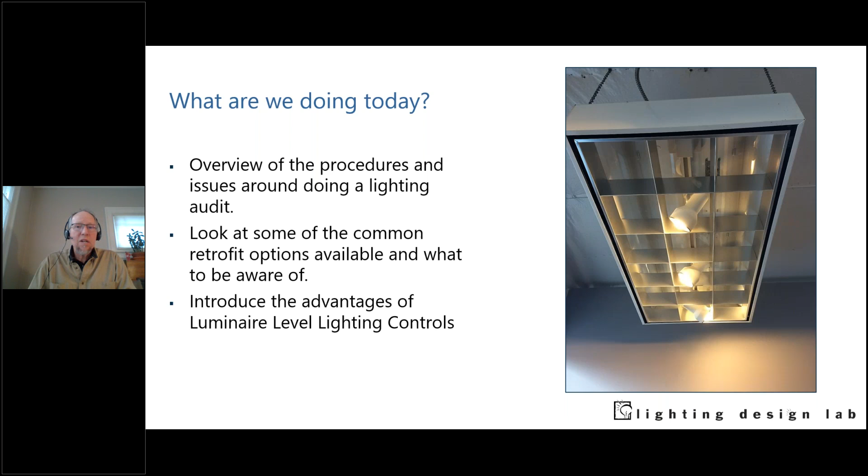So what we're going to do today is just talk about a little overview of the procedures and issues around doing a lighting audit, look at some common retrofit applications, and then we're going to talk a little bit about Luminaire Level Lighting Controls. I know you're all excited for that.

And we're going to try one of our little Slidos here. Let's see how that goes. I think Katie's going to run the helm on that one. You're not logged into it. Oh, so yeah, I logged in unfortunately. Well, the login in PowerPoint isn't logged in, I think. So we might—do you want to skip it? We can skip it. Mostly I was just trying to get a sense of the audience today. But I think what we'll do is just assume, just type in the chat. Yeah, if you've got questions, we're more than happy to try and address those for you. And I can't really, I know I can sort of see the chat. Yeah, sorry about that. Let's just power through this then. We'll go to the next slide.

All right, so when you're starting a project, meeting with the various players, it's always good to not really make assumptions about what you think the goals and motivations are for this project or for your client.

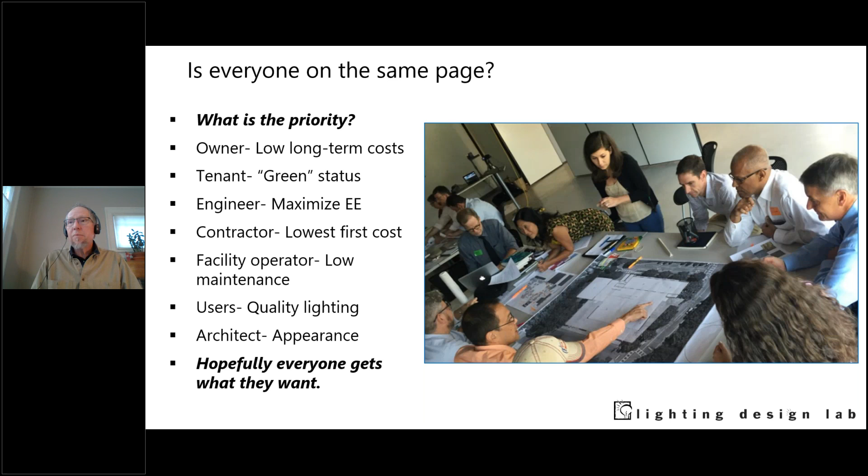So typically when we get called in on a project, it's because there's problems. There's lots of easy projects out there, but there's also difficult areas. You don't want to get bogged down right off the bat on the hardest part of the project. Take the big view, look at the overall project, find out if there's lots of easy energy savings, and then once you've got all those things lined up, spend some time on those difficult areas.

Another thing you might do is press a little bit if their goal is to retrofit all the lighting. We hear this a lot, that they want to go all LED, light emitting diodes. That's the new light source, and there's a lot of good reasons to do that. But some fixtures are going to be very difficult, if not impossible, to really retrofit with LEDs.

You're looking at probable replacement of those fixtures, and you just want to find out if that's really within the scope of what they're willing to do. We've seen a project where everything was pretty much easy, except they had some bollards out front in their parking area. Those were just going to be impossible to retrofit, and they were relatively new fixtures, so replacing them wasn't really a great idea.

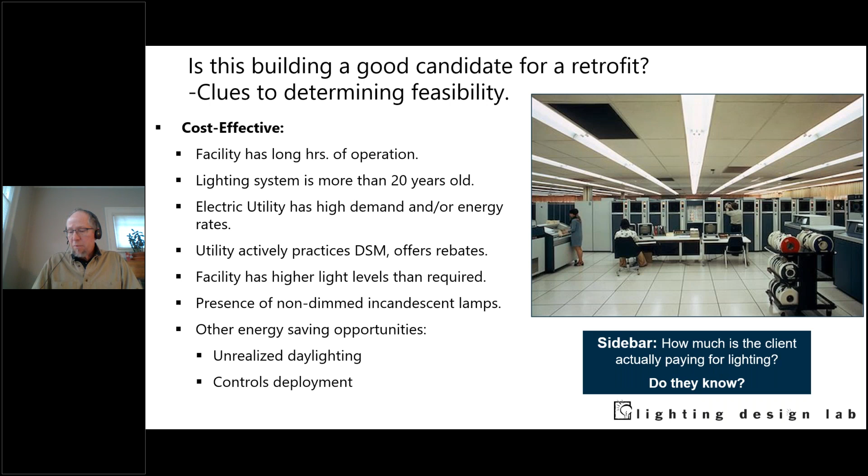Another thing that doesn't hurt is to see if you can find out how much the client is actually paying for the lighting. A lot of times they don't know - they just see a big electrical bill and assume it has to do with all of these things. But if you can parse out what the lighting component is, that may open their eyes and get them to do something.

Projects that are not particularly cost effective would be ones that have fairly short hours of operation - maybe it's just a 9 to 5 operation, 5 days a week, so they're not really using a lot of energy. Or the facility exceeds the existing efficiency requirements - maybe it's already a fairly new building, and it's got relatively stringent energy code thresholds that it's already met.

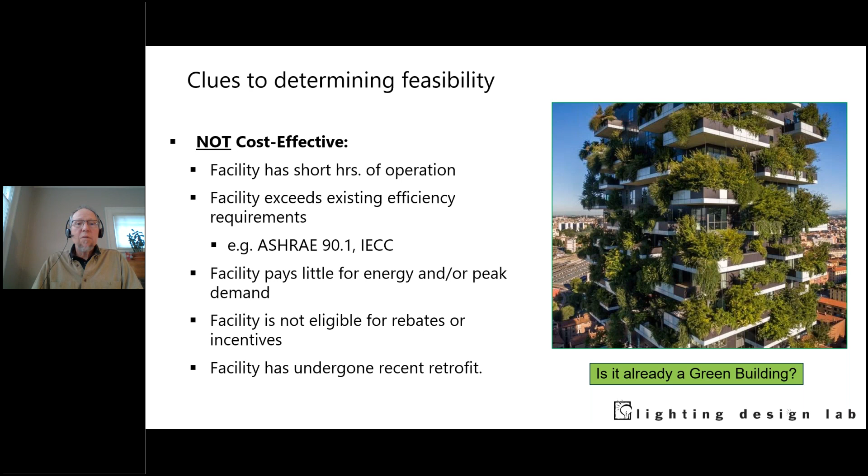It may already be a green building, as they say. Maybe the facility's undergone a recent retrofit, so the building's old, but you can look at the lighting and say, well, this was retrofitted 15 years ago, so it's still fairly modern lighting. All those things are going to be important to know going in, so you can set your client's expectations.

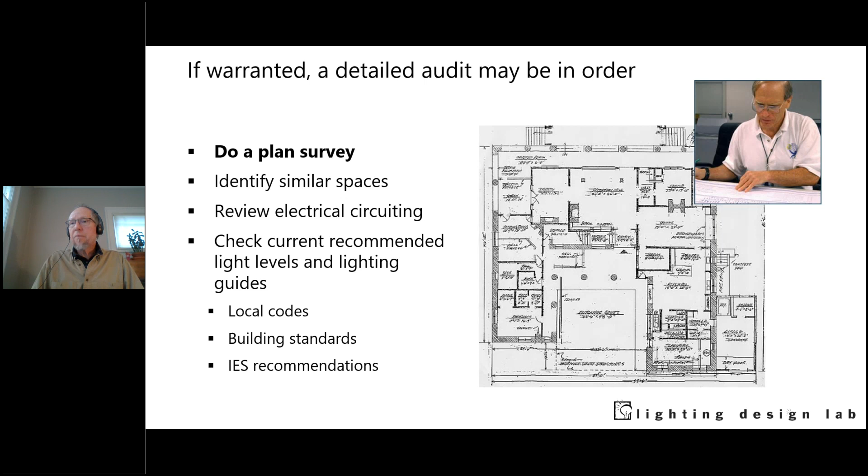You might have a fairly large facility like a school where there's lots of different rooms, but guess what, a lot of the rooms might be very similar. So once you've figured out what they have for their classroom, you're just replicating that over and over. You can look at what the local codes and standards are and see what the recommended light levels are based on, maybe they've got a campus-wide standard that they use, or there could be recommendations from a governing authority like the Illuminating Engineering Society, the IES recommendations. They maybe say, well, we just follow that. And that'll just give you a sense of where they're coming from. We'll talk about that a little bit more as we go.

So as you go out to even do a basic walkthrough, some things that you might want to have with you would be a light meter. For me, I don't put a lot of stock on measured foot candles, but it does provide a reference for what's there, and it can give you at least something that you can come back to, and we'll talk about that a little bit more.

You want to be able to measure things. One thing I can do in certain kinds of spaces is count ceiling tiles, and if the ceiling is 2x2 ceiling tiles, or maybe 2x4 ceiling tiles, you can just count them, and that's a way to get a rough measurement of the general size of the space.

Laser pointers are good, or rather laser measures, but just be aware that those don't always work outside during the day. There's too much light to really see them. So be aware that if you're doing that, you may want to bring a 100-foot tape or something like that if you're doing exterior light audits, so you can figure out how far the poles are apart, or something along those lines.

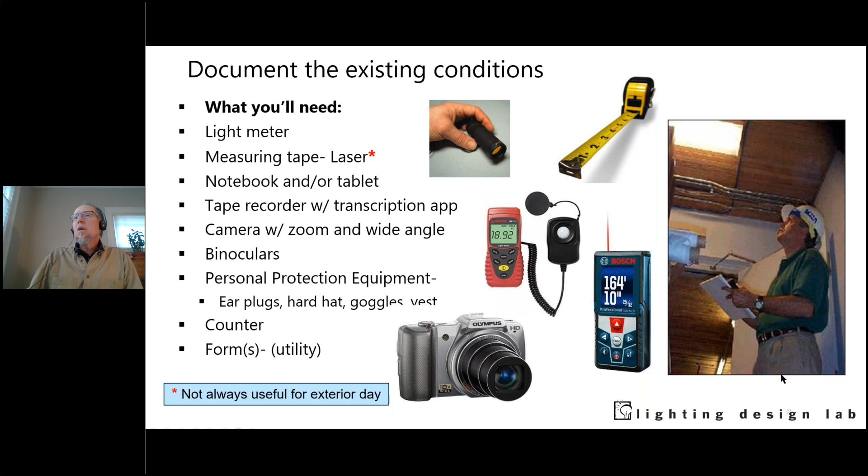So when you are looking at the lighting systems, you're going to want to look at the existing light levels, especially if the client says something like, oh, it's not bright enough, or it's too bright. That can give you a reference point.

You want to look at the types of luminaires or light fixtures that they have in place, and look at the mounting, how they're mounted. Sometimes a facility can have the same or similar fixtures mounted in different ways. A lot of times, particularly in industrial or commercial and some utility applications, you'll see a wraparound type fixture hanging from a chain, mounted to the wall, and the same fixture stuck to the ceiling. So that can be an easy way to know that even though there's lots of fixtures, they're all pretty much the same, if not identical.

You want to look at what lamp types are in the fixtures, and look at the color, to at least take note of the color of the light. If the color is consistent, and if you can find out the wattage, that's always helpful. You'll definitely need to know that at some point. Also the ballast type that they have, particularly for fluorescent systems, and what kind of daylighting conditions they have, and is there an opportunity to improve that?

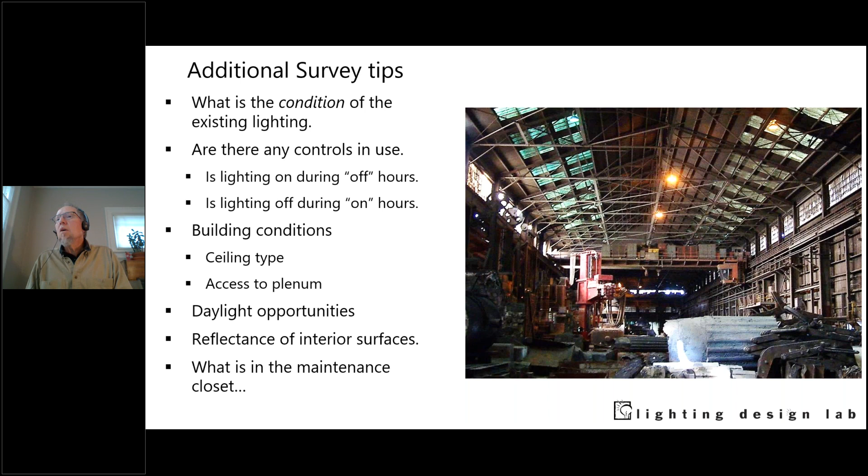So we have a little quiz. Katie, I don't know. I think what I'm going to do is just talk through these as we go. What do you think? Yeah, because I think our Slido isn't working. And so here, this would be a little review, we'll call it.

Which of the following suggests that a retrofit is likely to be cost effective? As we talked about, the facility has long hours of operation, so check. Measured light levels are higher than recommended practice, so yeah, that's another positive. So here we've got a community theater that has 50 stage lights that are 500 watts apiece. And so here's a case where we've got high wattage lights, but they get very little use. Maybe they do 4 productions a year for 2 weeks each. So otherwise they're off. So not probably a lot of return on an annual basis there.

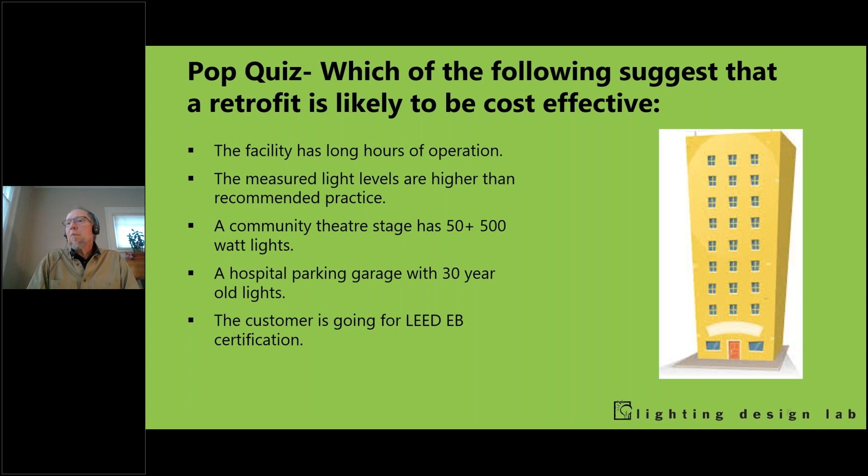Hospital parking garage with 30-year-old lights. So, again, a parking garage is going to get lots of use, particularly at a hospital. It's 24/7, and the lights are old. And then the customer is going for LEED existing building certification. So all of these really, except that middle one, would be good opportunities.

All right. So documenting existing light levels. So we'll probe on this a little bit more. So what is being proposed? A lot of times they'll say, oh, well, we need 100-foot candles, and I've seen retailers say that. That's just what we need. And it's a nice high round number, but what's it based on? You can find out, you can ask them about that, and we'll touch on that in a second.

What is recommended, and then what is that based on? They might say, oh, well, we've heard we need 70-foot candles. It's like, okay, who told you that?

Are the light levels consistent throughout the space? Sometimes they'll say, oh, we just need more light in this warehouse, and it turns out there are a couple of aisles that are dark because maybe some fixtures aren't burning. But for the most part, if everything was lamped up properly, the light levels might be pretty good. And then, are the users happy with the light levels?

They might say they don't like it, but again, you're thinking, well, it's not that bad. So then you have to find out what is it about it that they're not liking. It doesn't hurt to have some of those conversations.

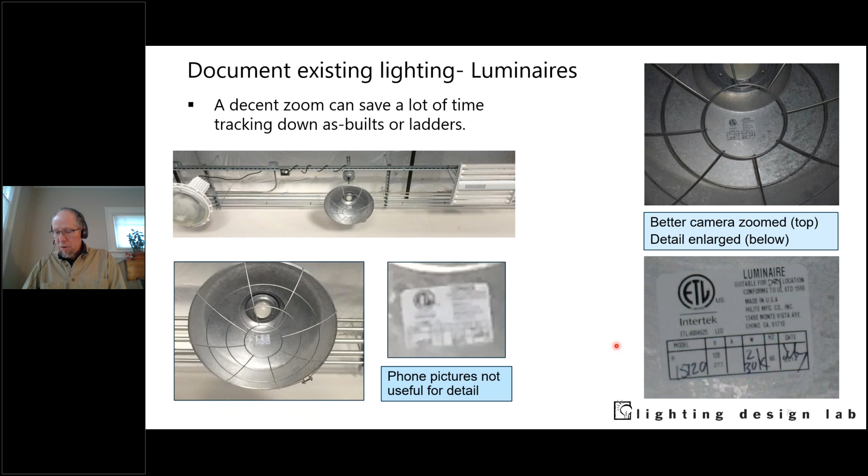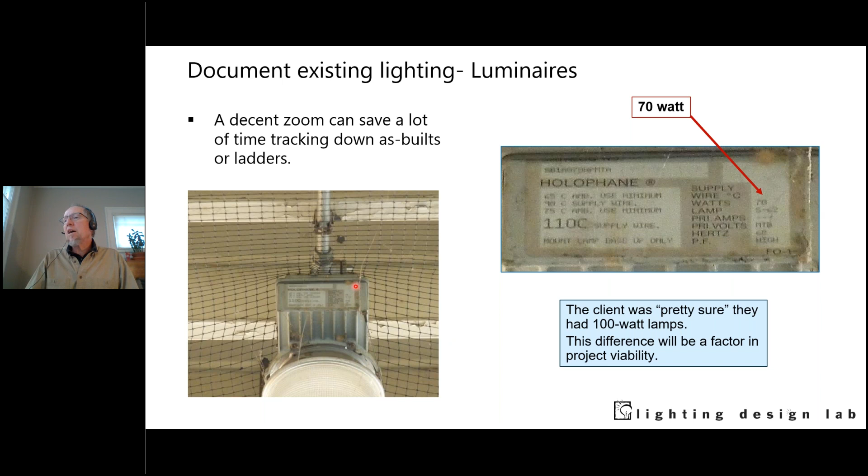Getting a ladder or a lift out to read that on site just would not have been practical. So it's good to have that equipment.

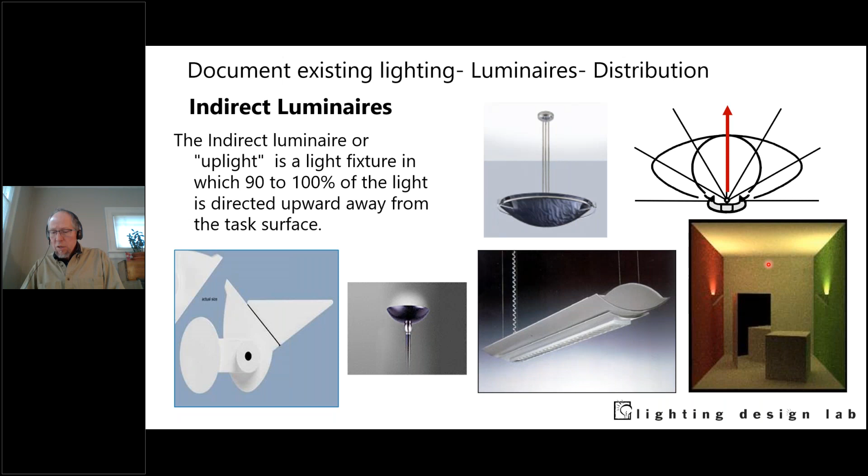And then a lot of fixtures are going to be some combination thereof — some light goes up, some light comes down. There's a wall-mounted fixture with a dish; maybe this one's a better performer, sending maybe 30% of the light out. We're still getting an indirect and a direct component with this linear product — a good amount is out the bottom.

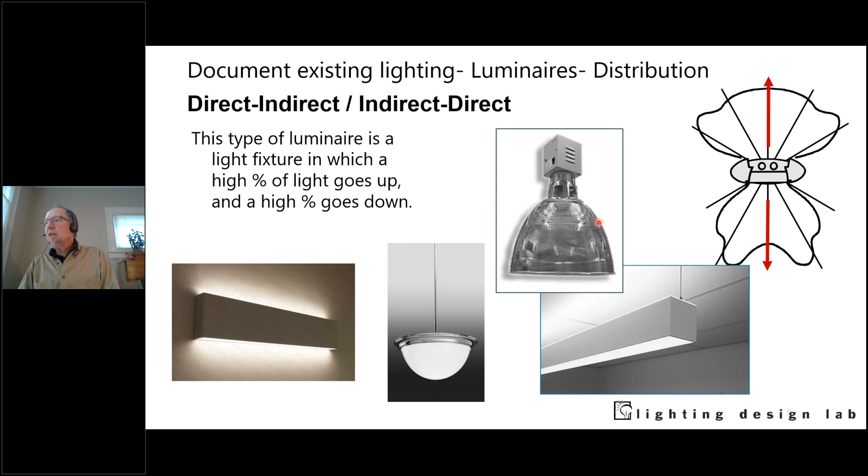Even some of these prism type fixtures, depending on how well designed they are, if it's an actual glass prism, most of that light will be coming out the bottom, even though it'll glow a little bit at the top, and that's by design. Whereas others, maybe it's molded plastic, it's sending light out the sides and out the bottom. So you kind of need to know a little bit of that information.

But it might be a big surprise once you get everything all retrofitted and it turns out the ceiling's dark, the walls are mostly dark, just because they didn't really understand what was happening.

So then, as far as auditing, looking at the overall condition of the components, you've had a chance to look at the general outside of the fixture, and maybe you can tell a lot just from that, but sometimes you can't. So you want to open up a few that you think are representative.

Are the sockets all worn? Do we have stuff dripping? Is that water intrusion? Is it some sort of fluid coming out of some of the components? What's the deal? Is the wiring all haywire? Has it been retrofitted? That kind of thing. A little superficial dust isn't what you're after, but it's a basic breakdown of the components.

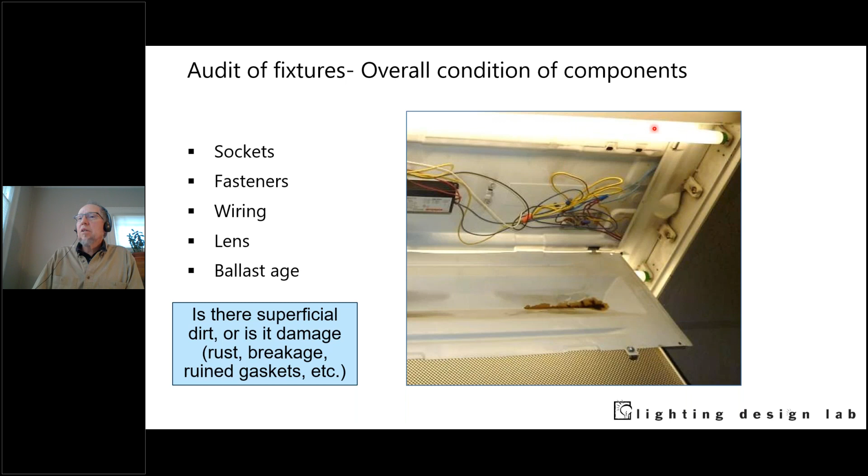So if you are replacing fluorescent lighting with LEDs, and we'll talk about that at some length later on, you're going to need to look at the ballast, and that'll tell you a couple of things. One thing, it'll tell you the voltage, like do you have 277 volts or do you have 120 volts. How old is it?

A lot of times the utility, especially if you're wanting a rebate, they'll want to see the ballasts. So you don't want to just throw them all in the dumpster before you've had a chance for an inspection.

Another reason you want to look inside is twofold. One is to see if they're consistent, right? So this is in one room in one building, and we found a 2-lamp normal ballast factor, a 2-lamp low ballast factor, a 3-lamp normal ballast factor, and a 2-lamp fixture. We found some battery backups. We found some 277 volt product.

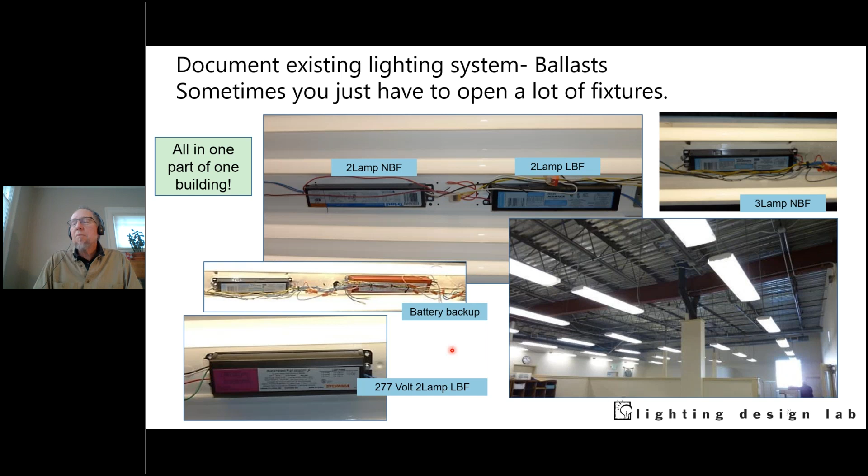So some retrofits you do, the idea is that you're going to use the existing ballasts, and we'll talk about that later. But they have to be consistent, they have to be adaptable. And if they're not, you're going to run into problems. Here we have a whole hodgepodge of things, so you have to check that going in. It's pretty rare that you're going to find all the ballasts the same, so just keep that in mind.

Then you want to look at the existing controls. Especially sometimes you're in a situation where certain controls are not allowed. For instance, an older way that we would see industrial applications, or sometimes even in a school gymnasium, they just have breakers that control the lighting. So someone would come in at 6 in the morning and flip all the breakers and all the lights come on, and that's how they would do it. And that's not allowed anymore.

But they may have old mechanical time clocks — those aren't allowed. It may be sensors, particularly exterior photo sensors; they really take a beating, so you want to be prepared to replace all of those on any kind of retrofit. Or they may have old style dimmers that won't be consistent or compatible with the new lighting.

I also want to look for a chance for some easy wins. Here's a case where we have a canopy with lights that are on all day. These could just be on a timer. You could say, at 9 o'clock in the morning we're going to turn these off every day, and they won't come back on until 5 or 6 at night. That would be so simple. If you could put sensors in there to tell you when it's not daylight, that would be another easy way to do it.

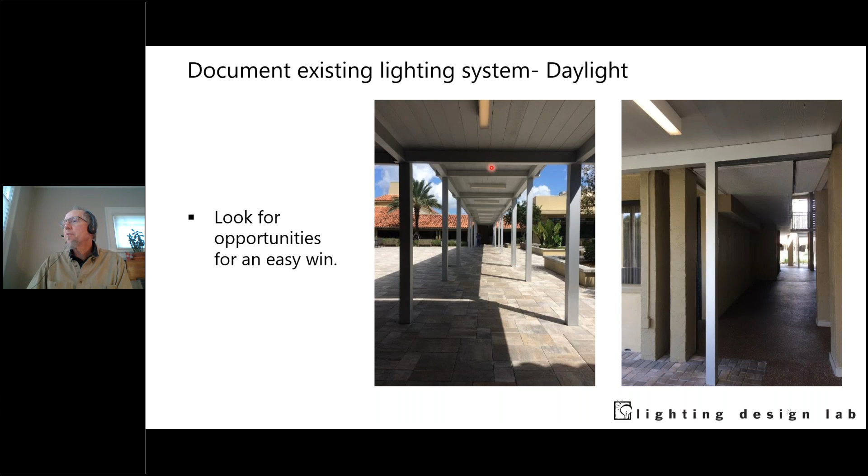So while you're out there, you want to look at the room surfaces. What you're trying to do with a lighting retrofit is improve vision — help the lighting help people see. And part of that system is the room surfaces. They can mitigate brightness ratios, which is controlling contrast of tasks and backgrounds, and they can also help you get more light.

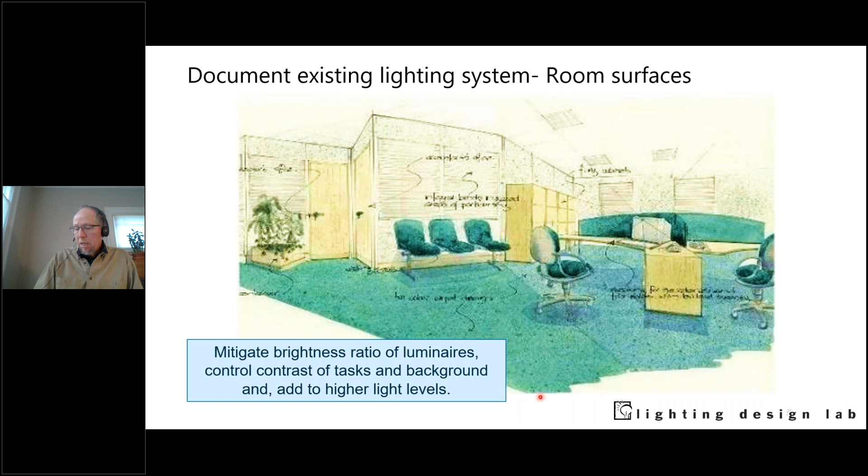Here's a case where I did a little model of a simple two-story office building. We've got some windows, but let's say it's nighttime or early morning. We've got a first floor and a second floor, and the second floor looks brighter. There's a reason it looks brighter — that's because it actually is brighter. And we can prove that.

So we took light level readings, or at least modeled the different light levels. Depending on your skill level or the team you're working with, you may run a model on some of these spaces, particularly warehouses or simple big box type spaces. Even parking lots are fairly easy to model. That's just a way to double check.

With some simple modeling platforms, all you do is put in the number of lights you're planning to use, the geometry of the space, and the layout of the lights, then hit the big go button and you'll get a number. It's like, wow, 35 foot candles, let's say — so here's our average foot candles, we get 35. We'll use that as our baseline.

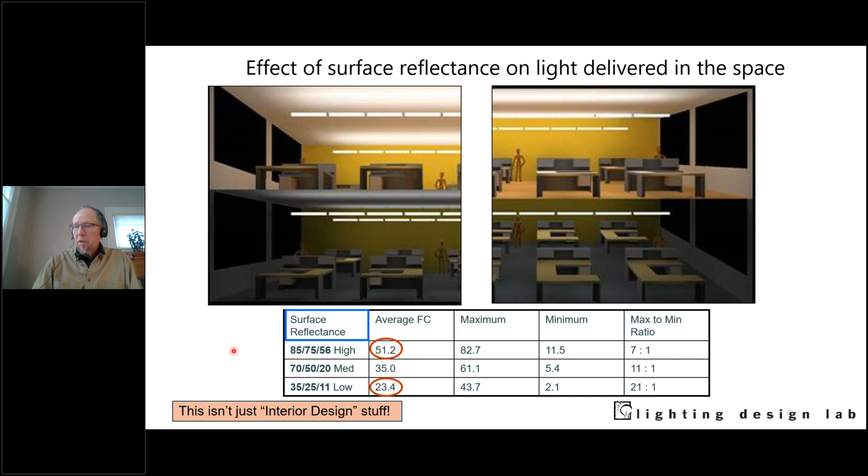And you're thinking, well, who's doing these dark surfaces? But this is pretty typical: saturated wall colors, dark floors, concrete, not uncommon to see. Here's an industrial application, and they just went and sprayed everything bright white. It's much safer, good visual acuity. Same thing here. But it can be even in humble areas. It's just a way to save energy and make it a safer environment.

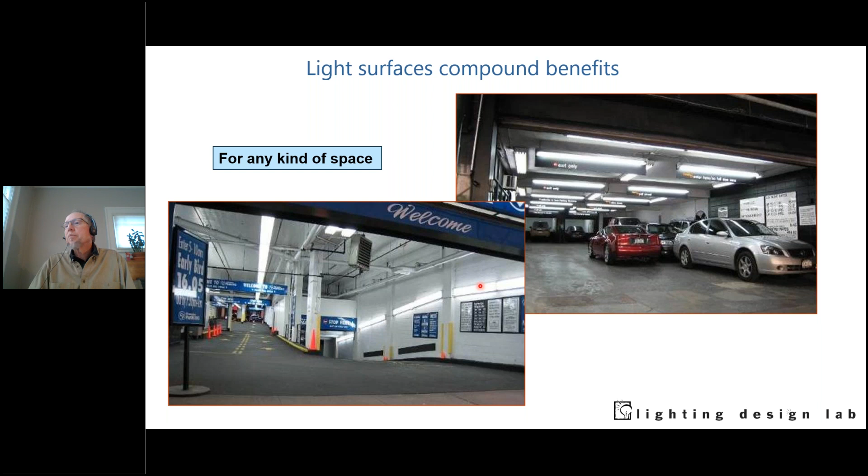So how do you know the room reflectances? Well, one way you can do it is you take your trusty light meter. See if I can do this here. And you take your light level on the wall, take a reading, and write it down. And then you hold the meter out about 12 inches from the wall.

Now, you probably don't want to do it near a window. So you want to find a space that has sort of typical lighting. And you take your light level reading there. So now you've got two light level readings, and you just run a simple calculation with the light that's incident on the wall and the light that's reflected off the wall. And that gives you your percentage of absorption. So you can use that number.

And sometimes you'll see color. Another way to do it, though, as I mentioned, is going into the maintenance closet, you might find the paint that they're typically using. Maybe they're not planning to repaint as part of this lighting project, although I always bring that up with them, especially if I see dark surfaces.

Anyway, so you can see what color paint they're using. As a case here, we've got this cream colored paint, and I look at it and it's 63% reflective, which is pretty good, but it could be better. Here's one that's similar, still very much an off-white, 74% reflective. Down here, this little accent tan - again, this could be the color they're planning to use - that's 50% reflective. So we see a real range here of reflectance.

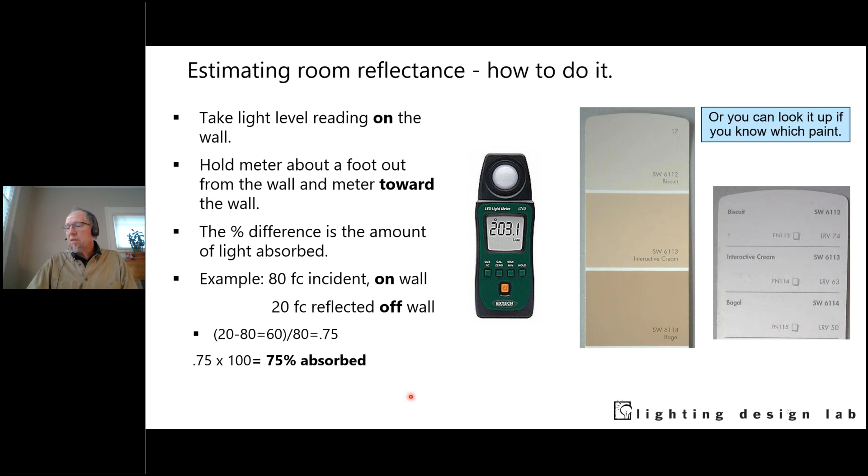Exterior audits. What's the best time to look at exterior lighting? This is kind of a trick question. Would it be during the night or during the day? Obviously it would probably be a little of both, because during the night you can see what the light's doing in those spaces. But during the day you can find out all kinds of other things, like, hey, wow, these fixtures are on, this one's off. What does that mean? They've got problems with their controls, but maybe this one's also burned out.

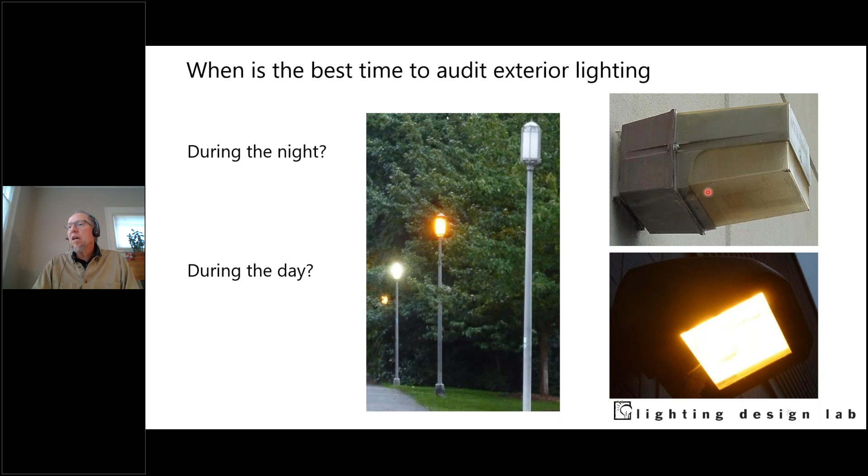Another thing you can see during the day: at night you look at this fixture and all you see is just this bright thing. You can tell it's working, but you can't tell much else about it. During the day you can say, oh my gosh, this lens is very discolored, very worn out. We need to replace the whole fixture, or at least the lens, to get better light levels. But you wouldn't be able to see that at night.

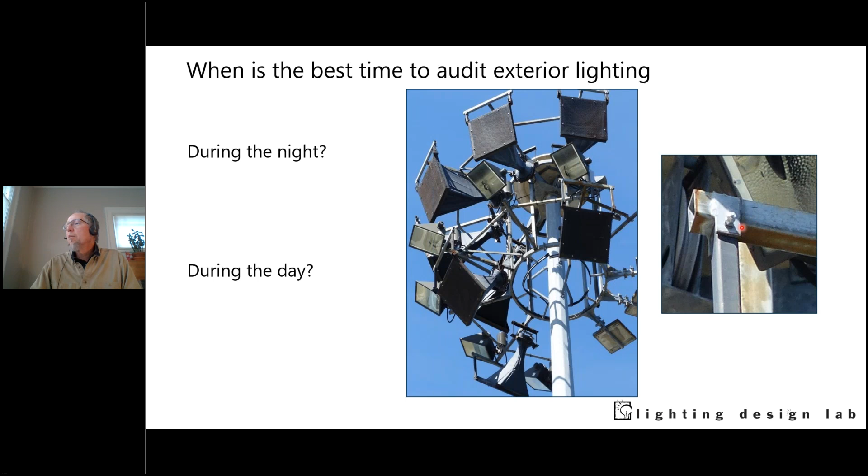Again, your trusty camera with the zoom lens - you can get up and see parts of the components, so you could tell the client, yeah, I know you want to replace all these lights, but you really ought to think about upgrading the structure because I see rust. In this case it doesn't look structural, but you might see some structural issues that you could draw to your client's attention.

Some more advanced analysis tools you might want to use include a luminance meter. A typical light meter tells you how much light is striking a surface - I put it up here and I can tell how much light is hitting that wall. But if I want to know accurately how much light is coming off of a surface, or off a light fixture, I need something different. With a regular meter we get foot candles, and with the luminance meter we get candelas per meter squared. You probably won't be using this a lot, frankly, and these meters tend to be very pricey, but it might be something you'll want to think about.

Data loggers - maybe you've got a warehouse application and the client says, oh, we're going to save a ton of energy because we're just not in these aisles very much. You put a data logger in there and find out, well, you're actually in there 8 times a day in this aisle, 16 times a day in that aisle, and 2 times a day in this other aisle. So you could do some consolidation and maybe get things a little more efficient, or at least calibrate your client's expectations.

Spectrometer - we're seeing more interest in that with LED lights. People are curious about how much blue light they're putting out or how much red light. A flicker checker - we're seeing that again with LEDs, especially the cheaper ones, which tend to maybe have some flicker.

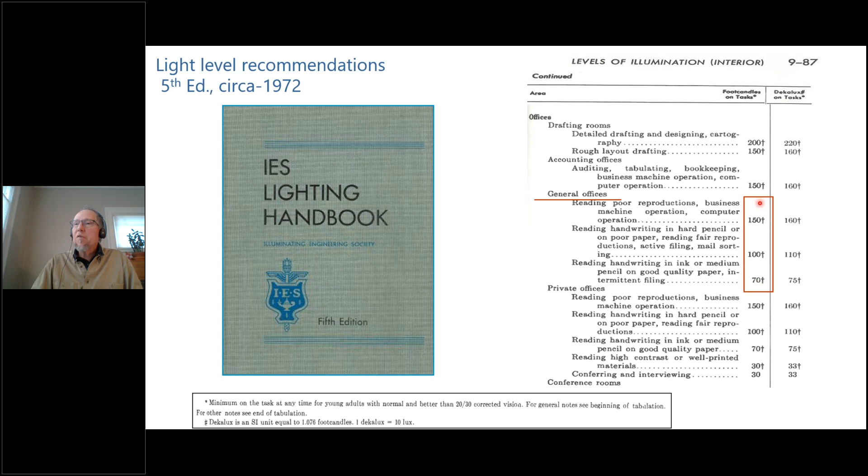So we look at how much light is recommended. Here's the IES handbook from 1972, the 5th edition. Back then, the recommended light levels for, say, a general office application - reading poor types of computer printouts or things that were hard to see - you needed 150 foot candles. If it was a better reading surface, maybe only 70 foot candles. But this was the range they would have for an office application back in 1972.

Now let's go to a more current one - this is the 10th edition from 2012. This is the most current, but it explains the trend here. So now we have offices from the IES handbook - offices, reading and writing. We go to high contrast of a black ballpoint pen, and we get a number here: 300. Wow, wait, 300, that seems like a big number.

Well, if we look here, these are foot candles, but what we currently use now is lux. So you're thinking, oh wait, foot candles, lux, that's going to be really hard to keep track of. The good news is 300 lux is about 30 foot candles - so it's about a 10 to 1 ratio.

Here we have for blue ink or lower contrast, 40 foot candles or 400 lux. So we went from 150, or maybe even as low as 70 foot candles, down to 30 foot candles, which is what's currently recommended for these office applications. So when they say this is based on IES recommendations, ask what year that's from. It might be from the 70s. Time to modernize.

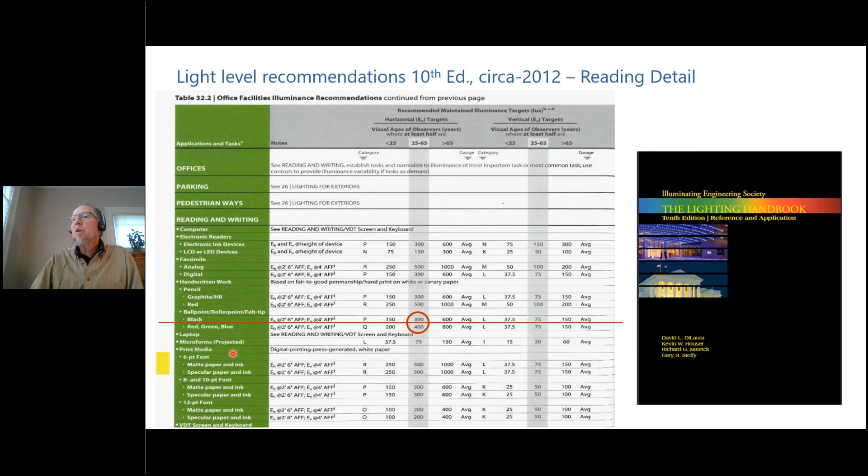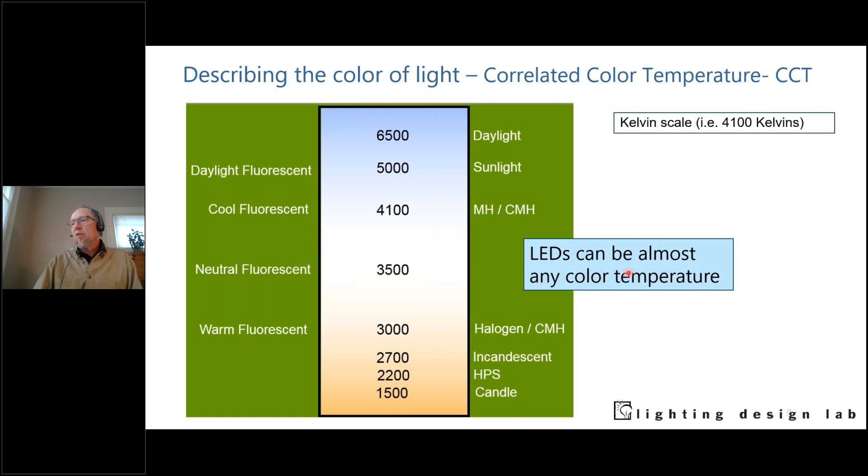Every light source has a number—candlelight would be around 1500 Kelvins, incandescent light around 2700 to 3000. Daylight actually has a number too, although it changes. Sunlight, same thing. Fluorescent lights have a whole range of possible colors. The good news is LEDs can be almost any color temperature—you just have to pick one.

Plus, if you're involved in retail or any kind of hospitality, colors look flat—it's just not good. The good news is almost all LEDs come in good to excellent range, so it's just a case of picking which one you want. Usually the higher the better when it comes to color rendering.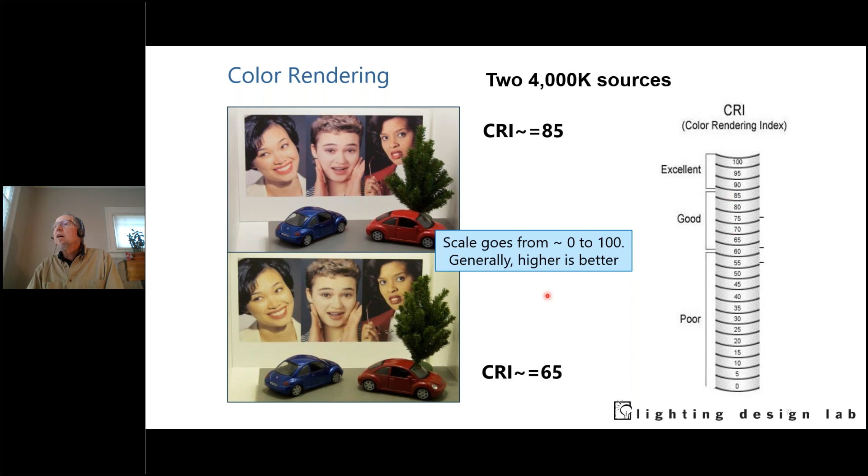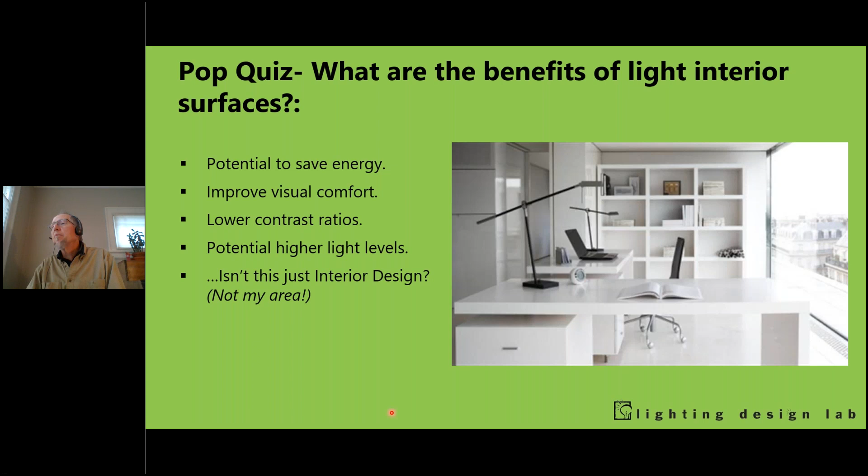Okay, we're just going to blast through these retrofit applications. Common retrofit applications are fluorescent troffers, or maybe I should say anything that uses linear fluorescent lamps. Recessed fixtures are getting retrofitted a lot. Exterior fixtures getting replaced or retrofitted, high bay industrial, and even interior surface mounted decorative fixtures.

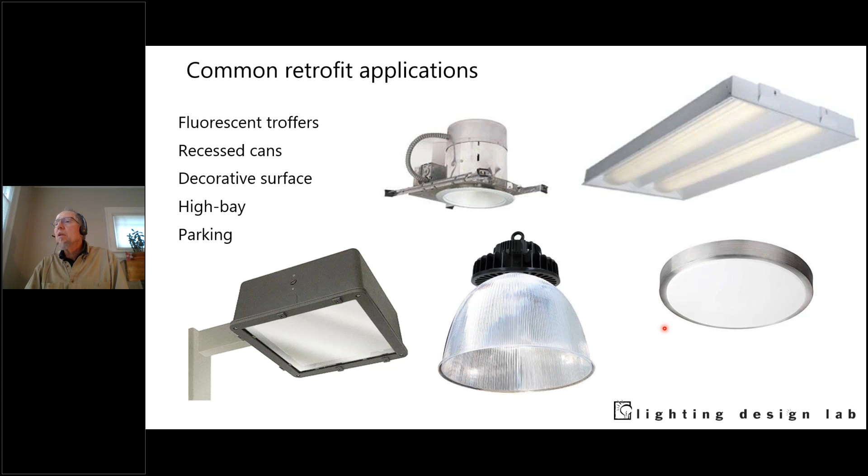So there's a lot of product out there that looks like a fluorescent tube but uses LEDs. We in the industry call them TLEDs - you might see that in some literature. There are all different kinds out there. Some have no lens, or a clear lens, so you get lots of sparkle, which may or may not be what you're interested in, or you might get patterning that's different than with fluorescent. The thing to keep in mind: when these are working perfectly, they look just like the fluorescent tubes you took out, except they ideally use less energy and maybe give you better longevity.

Sometimes they have wide end caps. Sometimes they have metal on them, although we're seeing less of that now. Sometimes they're just made of glass - they're not all plastic. Plastic has its advantages, but plastic's more expensive. There's a whole industry out there set up to make 4-foot glass tubes, and they're trying to get some more use out of that equipment before everything just goes LED.

One of the things about a fluorescent tube is, if here's a cross section of our tube, we get uniform light pretty much out around that entire thing - it's an omnidirectional light source. Whereas these TLEDs generally only have half of them radiant or translucent, and usually it doesn't come out fully - here we've got one that was measured at a 105 degree beam, which we'll see is maybe okay, and it's a 180-degree aperture. Sometimes the promotional material for these will say 240-degree aperture - well, that's great, but I still only get 105 degrees of light, not even 180 of usable light. So you want to be aware of that.

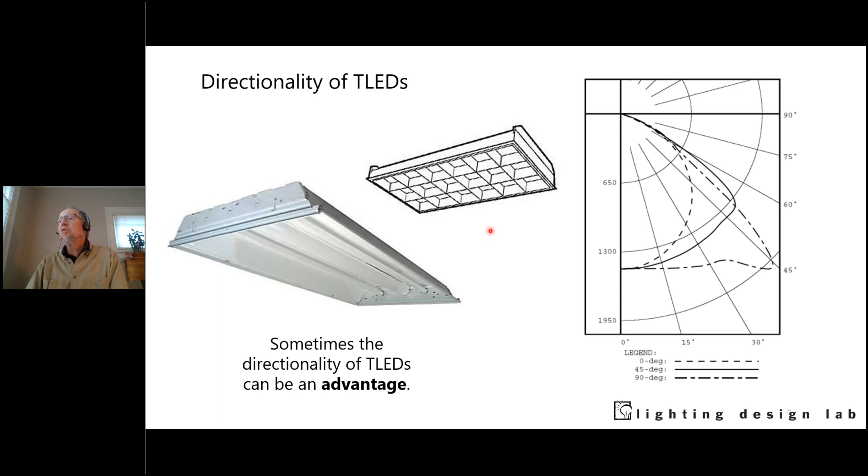If we're just coming out of a directional fixture with this fluorescent, we basically just want to send that light down out of the fixture into the space, so that directionality might possibly be an advantage. But if I have a linear pendant, here's our cross section, there's our light source, here's the light source again in its photometric diagram - we want some light to come up and some light to go down. And if I have one that's only one-sided, that's a problem.

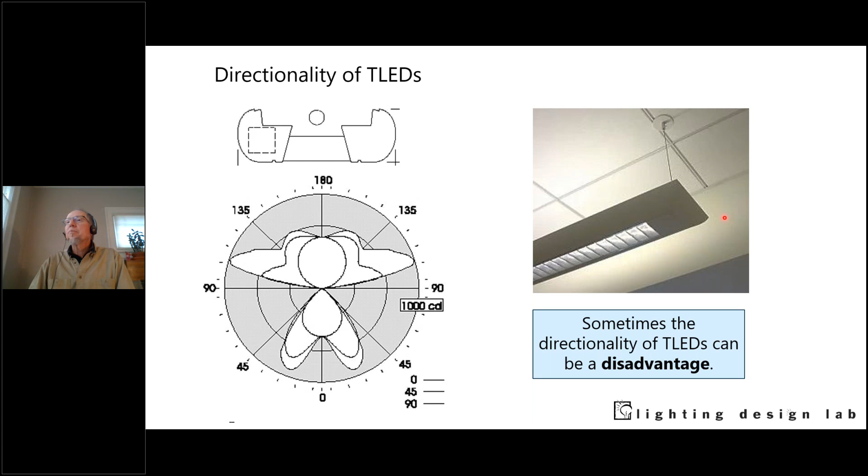So of the types of TLEDs, there are basically 3 sorts of wiring or non-wiring options that you have. One says no rewiring - it's ballast compatible, uses existing ballast, and that's called UL type A.

The other type does require you to rewire. You have to disconnect the ballast and rewire the sockets, and basically the sockets are getting line voltage - that's UL Type B. And then there's a variation where you're rewiring, but the driver is remote.

And the sockets are not even energized, and that would be UL Type C. So then you have to ask, when does a tube become a kit? We'll talk about that as we go, because that's an important distinction for some entities.

So let's go look at UL Type A, where we're ballast compatible. You always have to read the fine print. It says compatible with 90% of electronic ballasts. So 10% right there are going to be a problem potentially, including instant start, program start, rapid start, dimmable fluorescent, etc.

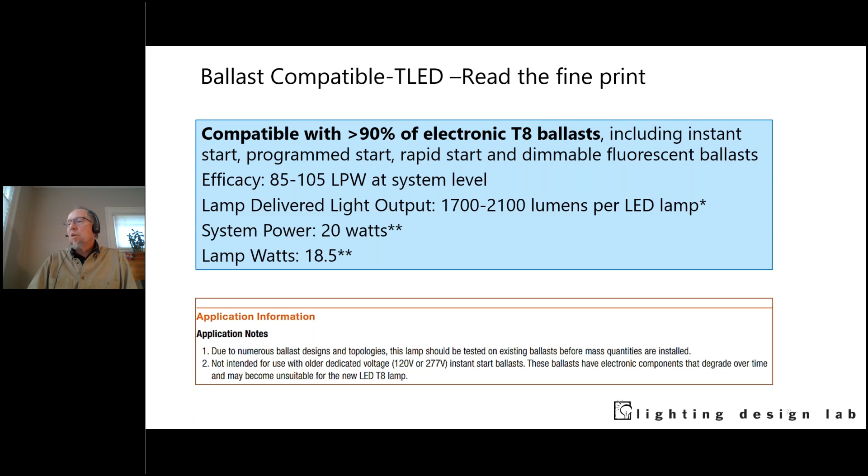This is not intended for use with older dedicated voltage instant start ballasts. Well, instant start ballasts are by far the most common kind you're going to see out there in the built environment. And if you're doing a retrofit, usually it's on older equipment - you're not usually retrofitting new equipment. These ballasts have electronic components that degrade over time and may become unsuitable. So okay, they're saying they're ballast compatible, but not compatible with probably what you have.

Here's another one where you rewire them. So you're thinking, okay, this ballast thing looks like a problem, so we're just going to do a rewire, eliminating the concerns we might have about ballast compatibility. Most include an integral driver, so these will have their driver built right into them, and they're powered directly by the 120 volts, sometimes even 277 if that's what you have.

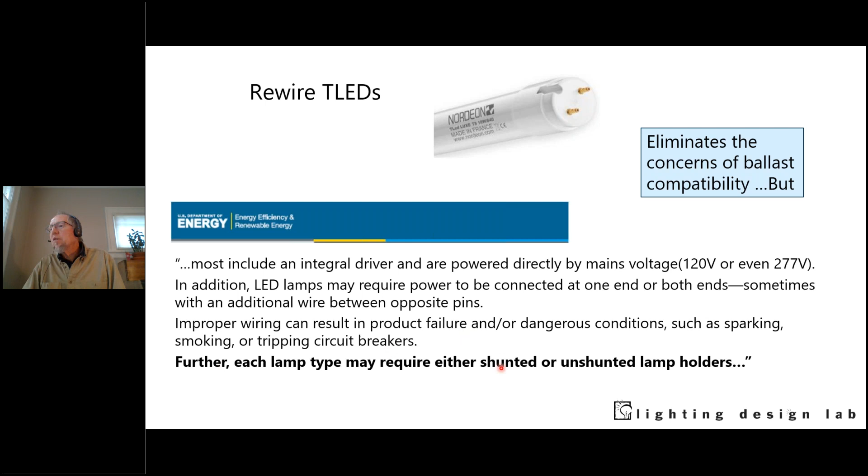Improper wiring can result in product failure, so you need to be careful because they get wired differently - different products get wired different ways. And further, each lamp type may require either shunted or unshunted lamp holders. Wait, what does that mean? What that means is the sockets, the lamp holders, sometimes called tombstones in the industry - there's two types out there. They look pretty much the same, but they're different.

So here's a rapid start, non-shunted. Here's an instant start, shunted. We just said that instant starts are by far the most common you'll see. Do not use this retrofit kit in luminaires employing shunted bi-pin lamp holders - okay, so that would be instant start, don't use it in those. Shunted lamp holders are found only in instant start ballasts. So basically what this is saying is you're going to be replacing the sockets - you're going to be bypassing the ballast and replacing the sockets. It's just a lot more work.

So there's products out there where they sell you two pieces of equipment - they sell you the tubes and a driver that would be brand new. So you're not dealing with old ballasts out there. You have a brand new driver that you put in, usually included, so you know there's compatibility. You're buying it all from one manufacturer. Here's another similar product - that's one way to get around some of that. But again, that's more work than just unscrewing the tube and putting in another tube, which is sort of the promise of a lot of those TLEDs.

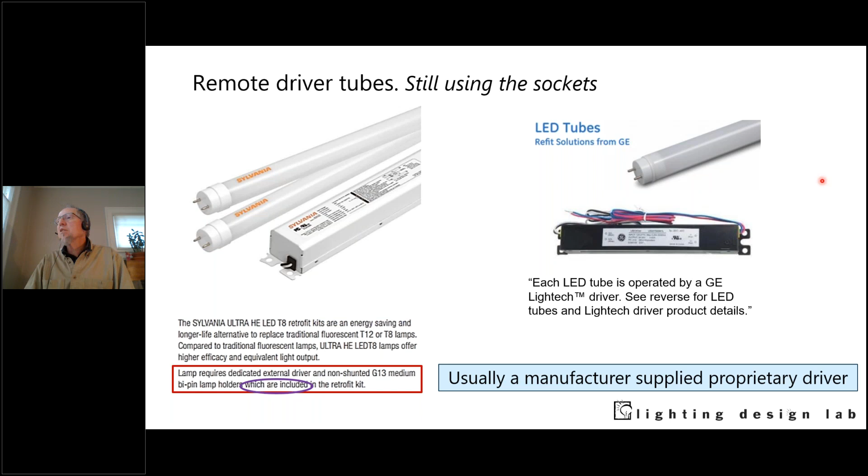Here's one that's a little different, where you have your remote driver. It doesn't come in through the pins, it comes into the back of the tube. So you're energizing directly there, and the pins, the sockets, then just become lamp holders - there's no power going to them. They're just mechanically holding that tube in place. That's one way to get around it potentially, assuming that the sockets are in good shape and aren't all worn out from vibration or heat. Again, that's where you want to inspect the fixtures.

And here's your basic kit. It looks a little bit like the one we just saw, but in this case we've got our remote driver energizing the tubes, no pins at all. These just don't even touch the sockets, and they are stuck up with magnets to the steel housing.

Just know that there are some requirements by some utilities that they won't incent on a kit. They want to incent on tubes, and sometimes the definition is if the product is touching the sockets, it's a tube. If it's not touching the sockets, it's a kit. So you want to look at the fine print with whoever you're dealing with, and make sure you're going to be in good shape.

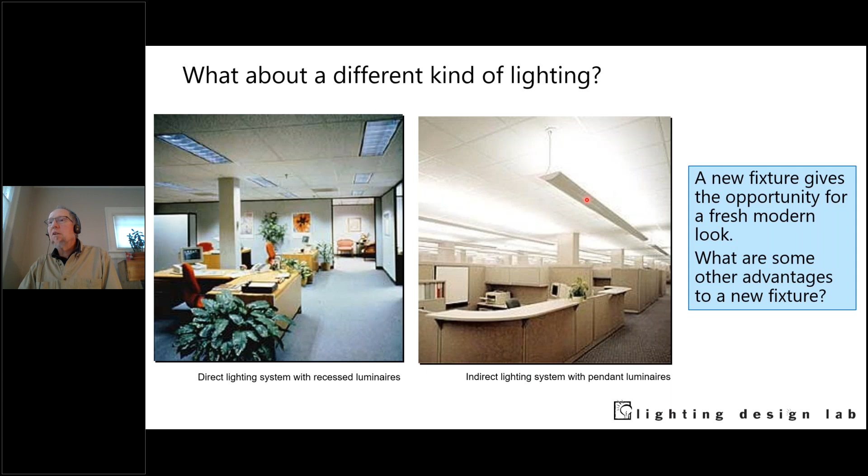That said, if this is your existing fixture and you're going to do a full interior remodel, with new furniture, new carpeting, maybe even new paint, it's probably time to put in some new lighting as well. Because what looked okay before probably won't look okay with all that new stuff.

All right, so here's another example of surface mount decorative fixtures. And there's two things we're going to touch on as we look at this. One is luminaire efficiency, and the other is replacing compact fluorescents with LEDs.

So here we've got this particular decorative fixture with four 1800 lumen compact fluorescents, so we have a total of 7200 lumens, at 83 watts. Here's our LED, it's 24 watts with 2500 lumens, let's say. And here's another one, 22 watts, about 2000 lumens. Well, neither of these look like they're going to come close to replacing this in terms of light output. There's a lot of savings, but not really getting us what we want.

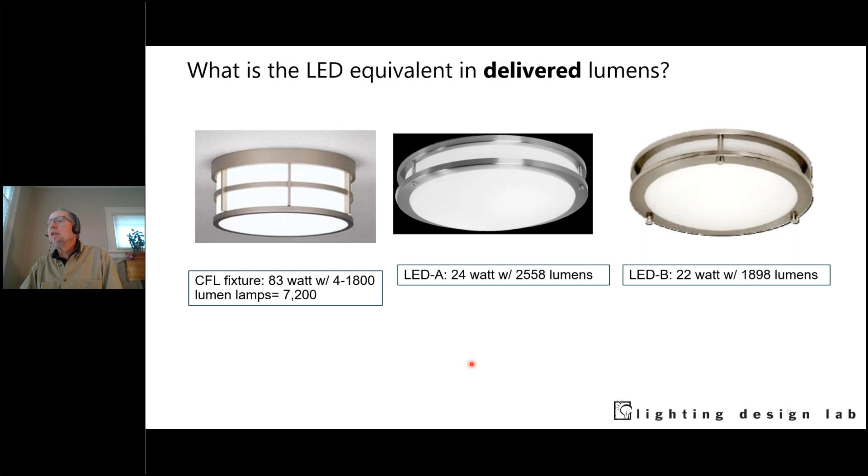But if we look here at the photometric file for this fixture, the existing one, we can see that it's only 37% efficient, say 40% efficient. That means 60% of the light never makes it out of that fixture. So I can take my 7200 lumens and take out 60% of that. Now I'm at 2600 lumens. And those other fixtures start looking more like the actual light we're going to get.

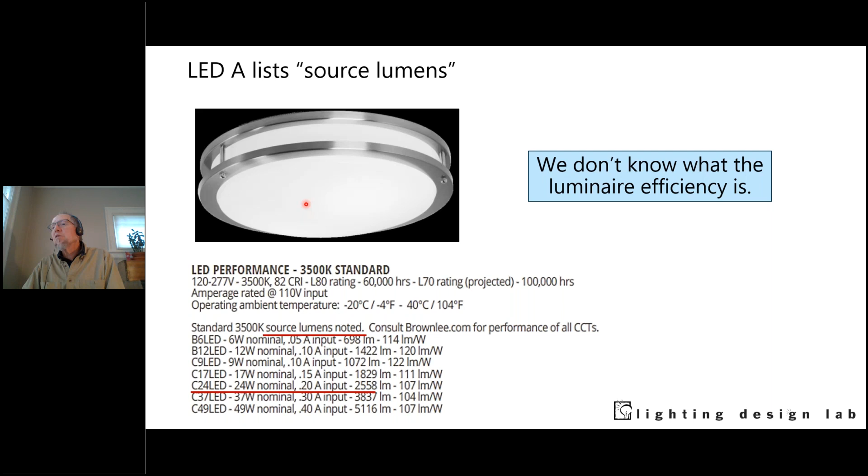But we have to read some of the fine print. So on the LED fixture A, it said source lumens, and they were the 2500. So we don't really know what the luminaire efficiency is of this fixture, but we can guess it's probably maybe 50%, or maybe more than that. Maybe it's because it's different materials, but there's going to be some losses due to the luminaire. When we just look at fixture B, it says delivered lumens 1800, almost say 2000. So even though it looks similar, this one's source lumens, this one's delivered lumens. This means they've actually put the fixture up, run it through, done a photometric check on it, and seen how much light we actually get out of the fixture.

And you can find that light output in lumens for the luminaire. It'll tell you how many lumens you're going to get. If you make any changes, maybe you change that from a white lens to an amber lens for whatever reason, you've got to redo the photometrics.

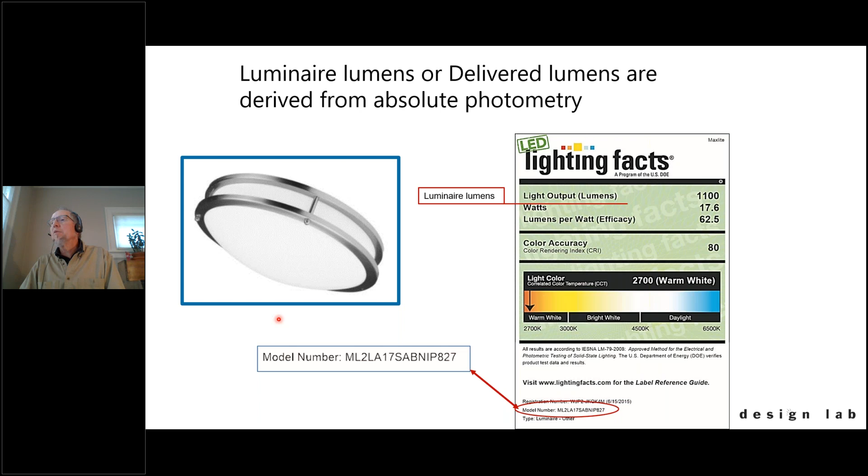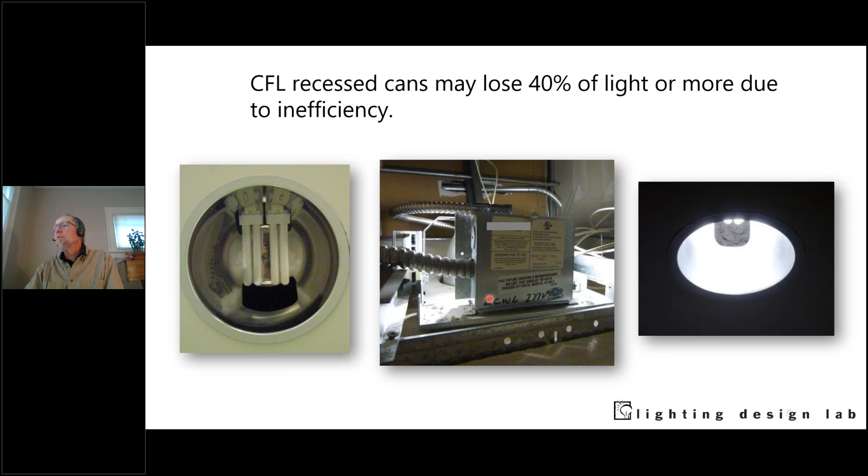That's just light that's not making it down into the work area. So that's how we can take a compact fluorescent, replace it with maybe a 26 watt, put in a 13 watt LED and get as much, if not more light, because these tend to be directional. But you do need to be sure they're compatible.

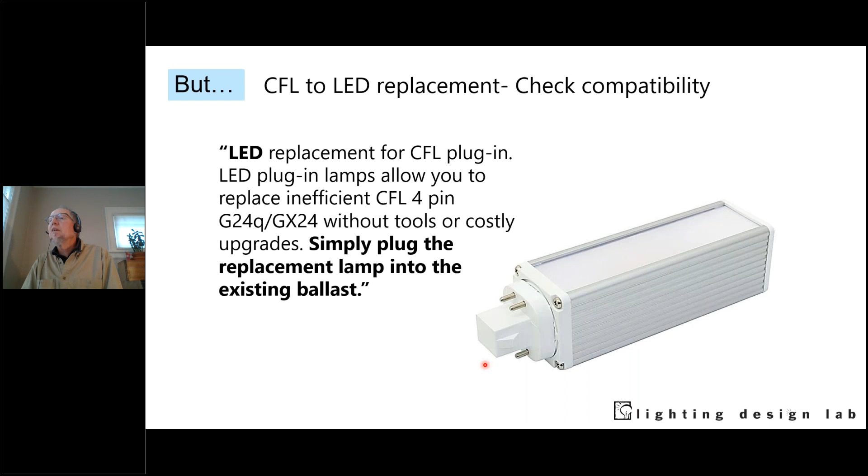Here's one where it says simply plug a replacement lamp into the existing ballast. So here's our LED directional, we just plug it right in, right? What could be simpler? Well, I have to make sure it's compatible. I looked at the ballast that we had in the fixture - it was Advance SmartMate. So here we go, advanced, and it's compatible with our 120 volt single lamp, but it didn't work. Don't know why, let's see.

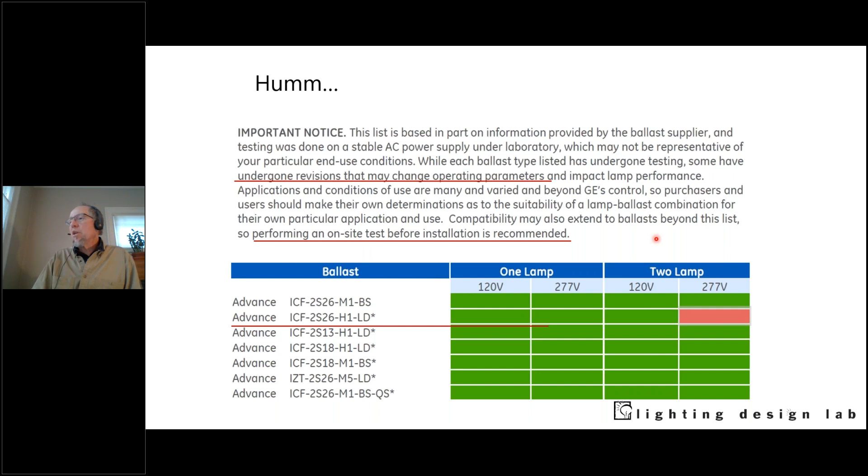So we read the fine print: while each ballast type has undergone testing, some have undergone revisions that may change the operating parameters. So performing an on-site test is recommended before you put in a bunch of them. It's supposed to work, but it didn't work.

Here's another one - it's like Tom Waits said, the large print giveth and the small print taketh away. So here we've got 'compatible with most fluorescent ballasts.' Well, that's cool. But then if I read the fine print, it says, for maintenance and energy savings reasons, this company recommends bypassing all ballasts for permanent installation. I'm pretty sure that if you go through the trouble of retrofitting these fixtures, you're not doing it for just a couple of weeks at a time. You just set it and forget it.

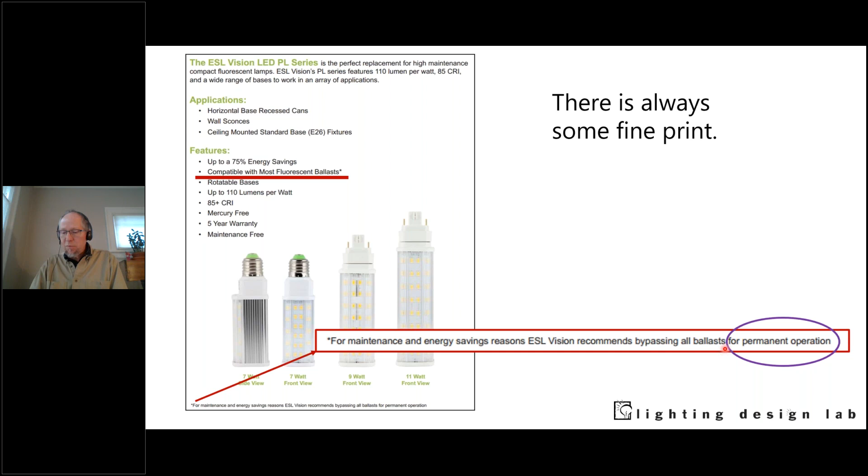Moving on to high intensity discharge.

Yes, really quick, kind of along those same lines. Just wondering what your opinion is about integrated LED fixtures versus standard bulb fixtures for commercial settings. Like, this person replaced the fixtures in their house with integrated LED fixtures, but now realizes if something goes wrong, they have to get a whole new fixture instead of a bulb. So is it not a practical solution for commercial? I mean, it's annoying for residential.

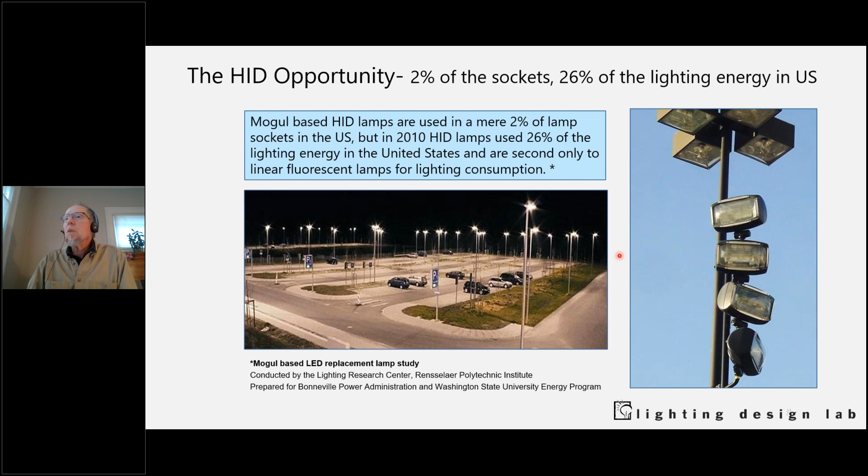But one thing to be aware of: most of what makes these high intensity discharge fixtures work so well - you can put them up on a 40-foot pole and get light going out two mounting heights in every direction, or you might want to send light in one direction, forward, if you're lighting a roadway, and you don't want light spilling all over the place - is the optics. They're designed around a point source, that tiny thing that's getting bright as the sun. You can control that very easily.

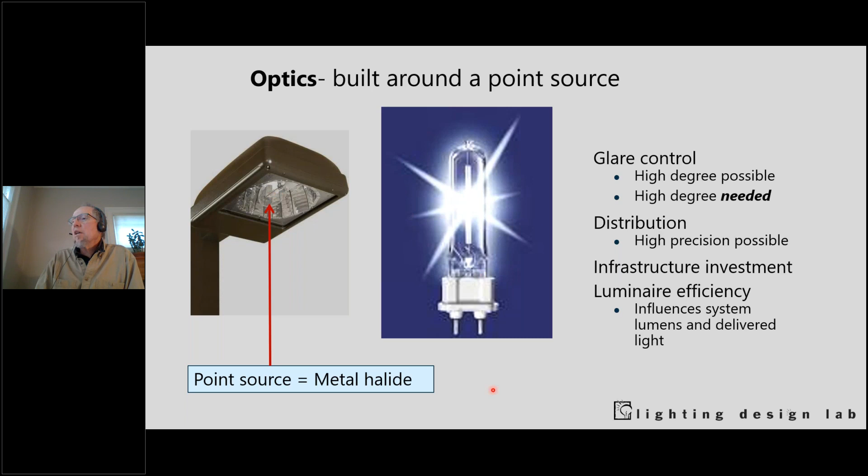With LEDs, they work on a slightly different principle. Usually you're seeing an array of LEDs. So here I've got 760 lumens for 7 watts. If I need more than that, I need a bigger array of LEDs. And so that's nothing like a point source.

It's maybe okay for some applications. Here's an omnidirectional, here's a directional. So maybe if I'm doing a shoebox type fixture, I just want the light to come down - I'm sort of bypassing this whole optical assembly, just pushing that light down. Here's another case where I'm pushing it down, directional.

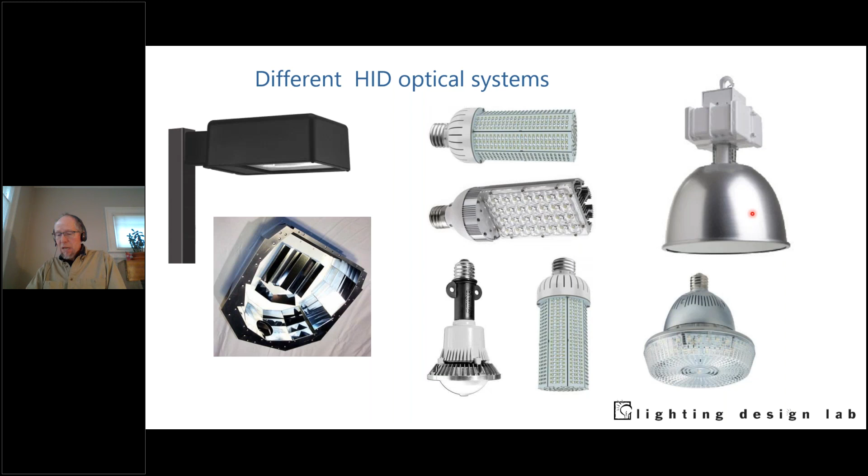That can be fine if you've got a metal reflector, but lots of times you have a translucent reflector, like this one before, and this is what they have now. For many applications that's fine, but we found in some retail applications they don't like to see that - they want the sparkle all the way. So you don't want to work all weekend putting up 400 of these things retrofitting, only to find out you have to redo it again or take them all down because the client didn't know that's what it was going to look like.

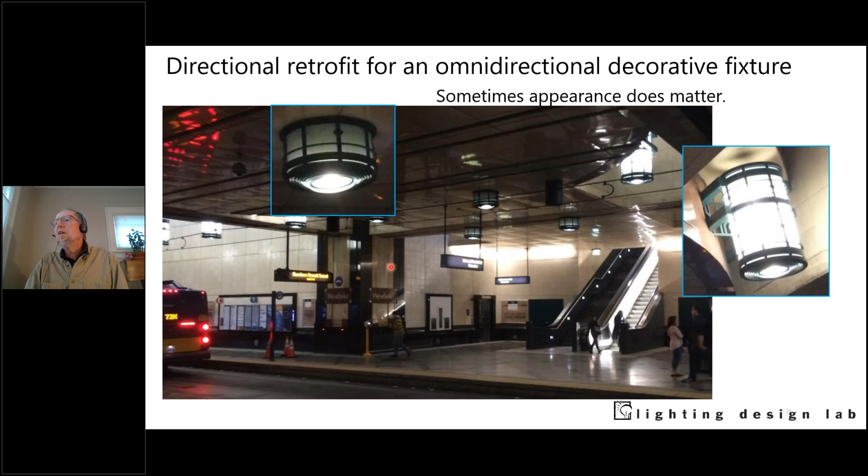Here's another case, you can tell how old this picture is. This is the bus tunnel in downtown Seattle, now it's the transit tunnel for the light rail. These fixtures got retrofitted, and these ones got retrofitted too, but they couldn't get anything for that upper part, so now those are just dim. You can see it's nice bright tiles here, but we don't get the vertical surfaces lit with these. Could be a deal breaker in some applications.

Quickly, here's a project we did, a big industrial space. You can see there's a person standing there, 28-foot racking. We had a lot to fix. These were old mercury vapor fixtures that they wanted to retrofit, and they just brought us in to say, hey, what do you think of this retrofit? So what we had to do was first model it with the old fixtures. We guesstimated, we knew they had 400 watt, and when they were new, this is how much light they would have had, about 30-foot candles in this big space, and about 2 watts per square foot for 64 fixtures.

So with the retrofit, it was a screw-in retrofit here, wattage down at 160 watts. We got 35-foot candles, more light, 0.7 watts per square foot lighting power density, for 64 fixtures. So hey, we cut the power in half. Let's pop the champagne corks.

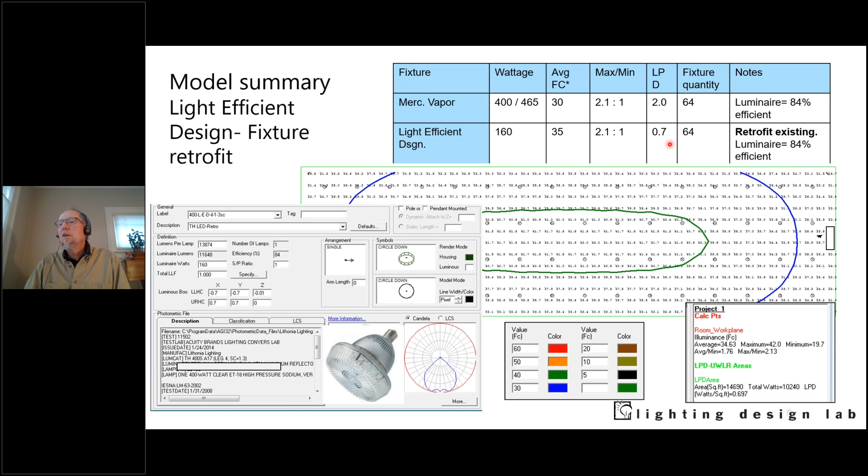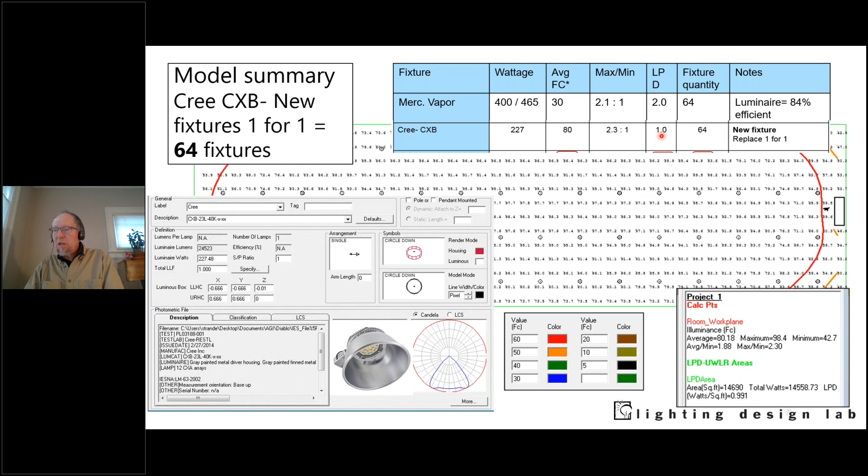But what would happen if we used an actual fixture? So here's a real high bay fixture. They were 227 watts. We get a whopping 80-foot candles, 1 watt per square foot, 64 fixtures. This is way more light than we need, and the power density has gone up a little from 0.7 to 1. But if we look more closely at these numbers, that's with 64 brand new fixtures.

But what if we only used half of those fixtures? Because there were a lot of fixtures in that space. Now we're at 42-foot candles, 0.5 watts per square foot, and we've only purchased half the number of fixtures. So even though they were more expensive fixtures, $500 fixtures, the retrofits they were using back then were $300 a piece, so that was real money. And by the way, they already had to send somebody up on a lift to rewire those fixtures. So just from a luminaire standpoint, it was actually cheaper, and they saved more energy. So sometimes it doesn't hurt to look a little more closely at these projects.

So here we go. Before doing an LED lamp-only retrofit, always check: that the fixtures are in good shape, that the lamp is compatible with the electronics in the fixtures and the existing controls, that the optics are appropriate, and that the utility is agreeable. You want to make sure it's something they're going to want to incent on. Is it an Energy Star fixture, or is it on some other list? And, oh, by the way, that the customer has enough money — no, that's just a little joke. But still, you want to check all these things to make sure you're retrofitting the proper fixture.

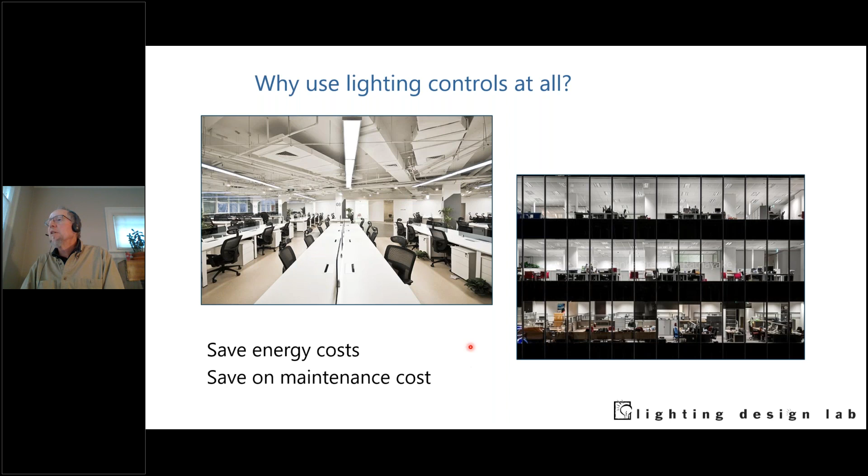So how do you control them? Well, you can turn them on and off. It's kind of a blunt instrument, right? It shouldn't necessarily be just all or nothing. So we could put occupancy sensors on them. That's pretty good, so now we know when the space is empty, the lights will be off. But what about when just one guy's in there? I don't want to belittle this guy's importance, but all the lights are on for just one person in this big room. The other way, you've got all the lights off pretty much, and now we've just got one lonely person in this little pool of light. That's not necessarily what we want either.

So let's see if we can get to something that we're going to like. Well, lighting controls — our demands for lighting have become a little bit more nuanced, a little more sophisticated, a little broader.

We're used to lights changing intensity. We're used to dimmers, lights changing based on occupancy, lights changing in response to changing daylighting conditions, and lights changing based on our preference. Maybe the tasks change, so the lighting would change. So all these things we're either expecting or accustomed to.

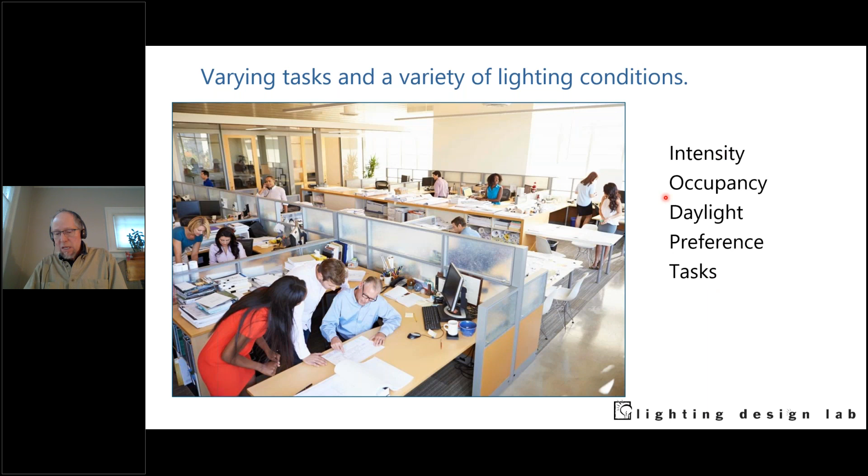And the ways that we do that are with switches. Sometimes we have switches, but usually we're using a time clock. We're using sensors, daylight sensors, motion sensors of different kinds, or even just manual dimming.

One of the problems historically with sensors is setting them up. We have all these little dip switches we're playing with, or little dials that you need tiny screwdrivers for, and it's just been a mess to set up the parameters by which we want the lighting to change. So wouldn't it be nice to have just one button?

So we have this one button and we have to press it. Say we want to change the occupancy delay to 15 minutes. We have to press the button, first get it into programming mode, then press the button 7 times. Got to count 1, 2, 3... it's a 7. And then it'll flash back to you, and you have to count the number of flashes to confirm that yes, you hit 7 and not 10 or 8 or 6.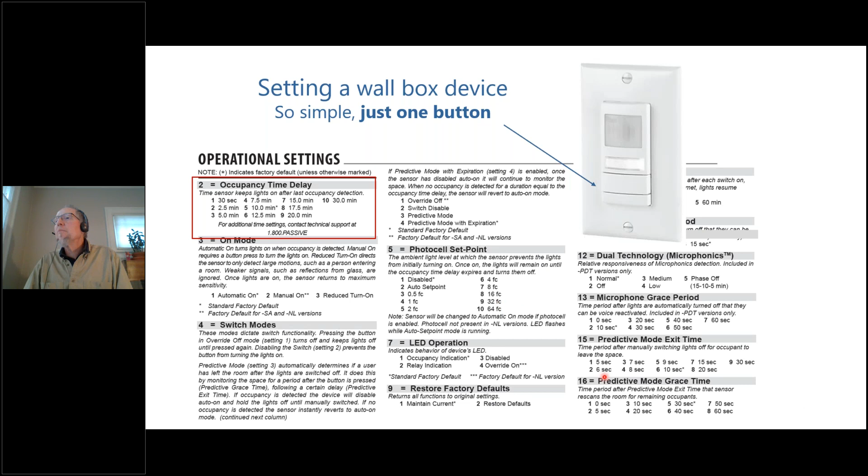And so then you hit enter, and then maybe you want to change the set point for the photocell. You want it to be 32 foot candles, so you got to press it 9 times, and go through the whole process. It's kind of a mess, going through all these different menus while trying to remember which function you're setting.

Meanwhile, you got the painters going through, you got punch list, some guy's trying to lay carpet. You're going from restroom to restroom setting these up, and then now you're trying to set up classrooms, and it's kind of fraught.

So now we have fixtures that are sort of smart. They're self-programming, and that's pretty cool. I will say these are pretty cool when they work. You put the lighting in, take your controller, press the big button, and it'll go through sequences and set itself up. I've seen it work, and it works pretty good. Different companies make variations on this, but if there's a hiccup where you have to change it, it's kind of a mess. So not perfect.

Another thing, this one has this sort of wand with just a couple buttons, and you're not sure what they necessarily do. We're used to these sort of GUIs, graphical user interfaces, either on your phone or a tablet. There's issues with compatibility there, but at least it's more intuitive. So there's progress as we go.

One reason that we do controls is because they're required with energy codes. For instance, daylighting responsive controls are mandatory in most spaces nowadays.

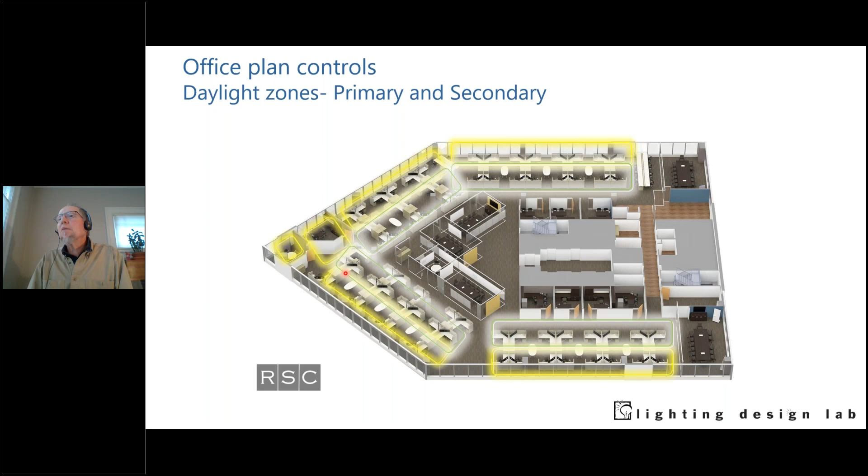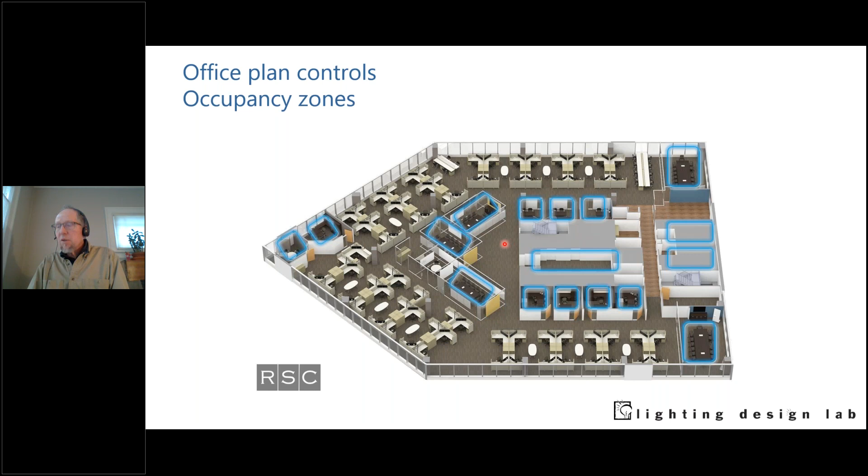Layer onto that, we've got occupancy controls. They're also mandatory in lots of spaces. We're used to seeing occupancy sensors in closed offices, restrooms, conference rooms, those kinds of places. But now pretty much every place needs occupancy controls of some kind. Layer on top of that egress pathway lighting that you either want to put in or are required to put in, and the whole thing gets very complicated very fast between the daylighting, the egress, and the occupancy everywhere.

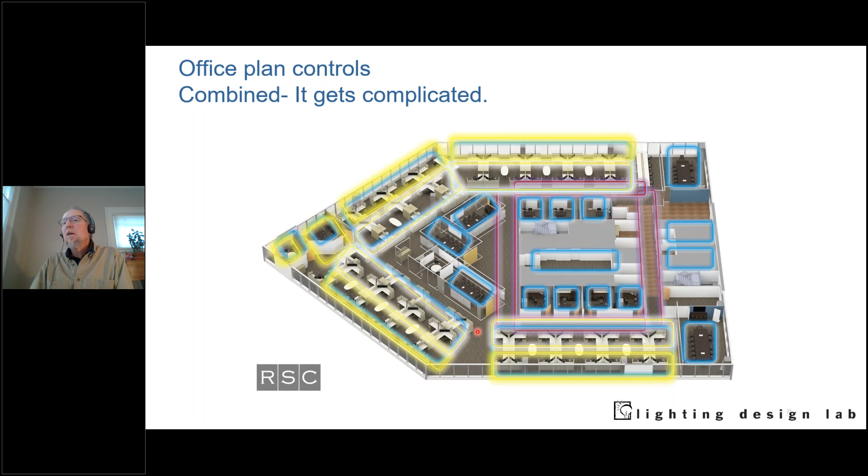What can some of that stuff look like? When we've got a room that's empty and the lights are on, we know that's not good. You look inside that gymnasium and see the lights on, well, we can fix that. Room's empty, the lights are off, and there's lots of daylight. That looks pretty good. What happens when the room is occupied? Does someone walk in there and all the lights come on even though there's plenty of daylight?

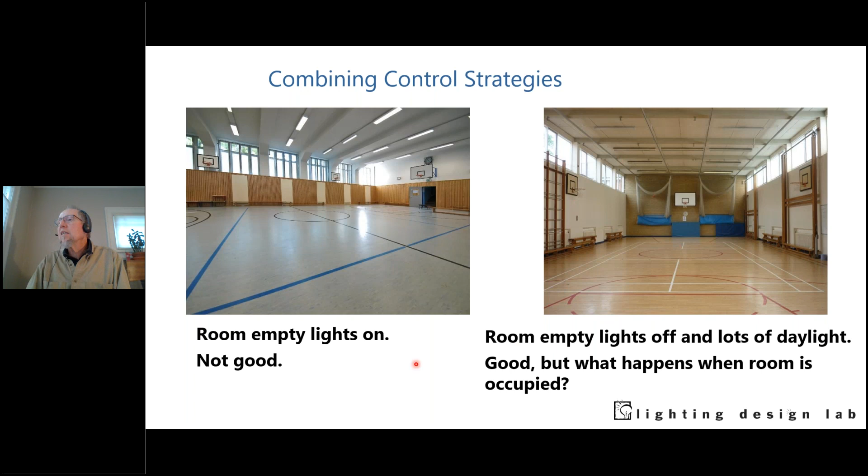What we would ideally like to see is occupied space with lots of nice, good daylight, and the lights are off. That's a success. So how do we get there?

Well, we can do all these different controls we talked about, the occupancy sensors, daylighting controls, those sorts of things, or we can use what's called Luminaire Level Lighting Controls. If we do that, we basically bypass all of the controls criteria in the energy code. Luminaire Level Lighting Controls is a lighting system consisting of one or more luminaires with embedded lighting control logic, occupancy and ambient light sensors, wirelessly networked, and local override switching capability.

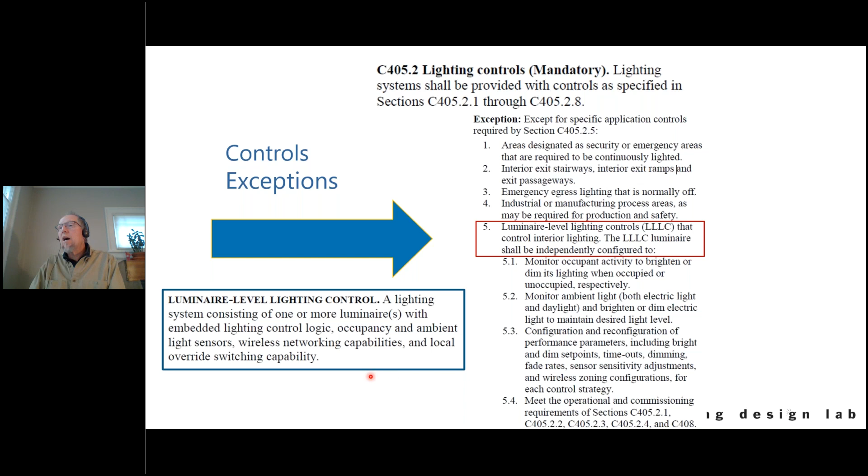Wow, are they saying every fixture needs to have its own controls? That could never happen. Well, we're used to seeing that - we've had photo controls on roadway lights. I don't know, maybe not everybody's a lighting nerd like me, but I see photocells on roadway lights all the time. And that's a case where we have one fixture and one controller.

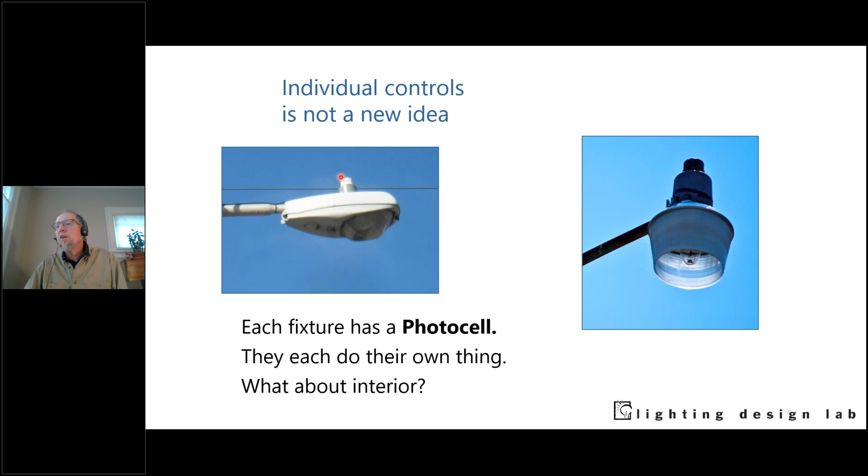We've also started putting them into warehouse lighting spaces. We've gotten rid of the metal halides that were almost impossible to control. And once we went to fluorescent tubes, high output fluorescent tubes, we could add a controller so that when spaces were empty, the lights would go off.

But you get into like a warehouse, the lighting, there aren't as many lights. When you get into an office space, interior spaces, there's just a lot more lights, higher fixture density per square foot. So putting a little controller on every one of those is a lot, and historically didn't make any sense. But now we have a convergence of technologies and timing.

So the technologies are that we've got miniaturized control devices. They're littler, they can be built right into the housings without too much trouble. We've got a much more controllable light source - even though fluorescent has been controllable, it's just not as controllable as LEDs. They're a lot easier to control.

The thing is, you might have noticed when I read the definition of a Luminaire Level Lighting Control system, it's networked. So trying to network all that stuff together, in the early days - the 80s and 90s, even the early 2000s - bandwidth just wasn't there. Now we have much higher bandwidth systems. And the other thing pushing us over the edge is more demanding energy codes, so we're often required to do it. So all these things have come together to help that out.

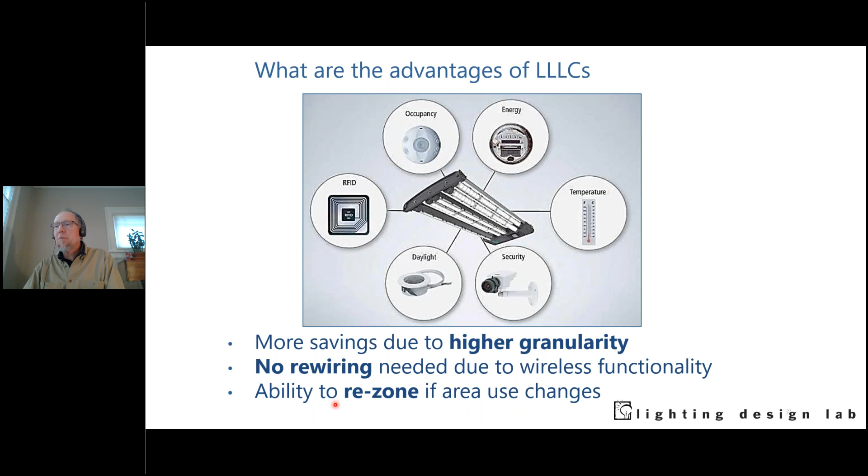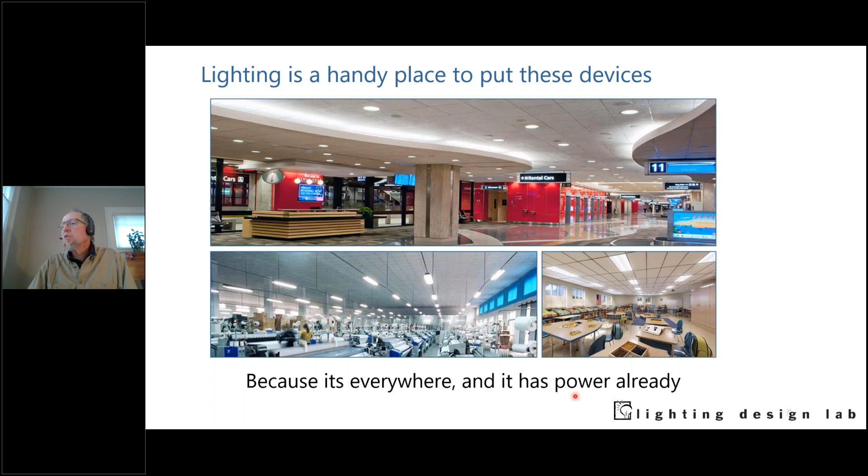So their ability to rezone if the area changes, use changes, is pretty simple - you just reprogram. And lighting's a real handy place to put these controls because lighting's everywhere that people are, for the most part. It's usually up high so it can kind of see into the space for occupancy reasons. And as I mentioned, it offers power, which is usually something that the controls need on some level.

So how might this look in a real application? Here's a big floor plate of an office plan, and we can see there's our elevator lobby here. So what might this look like? Let's say it's nighttime, and for whatever reason we decide we just want to have some lights on all the time at 10%, so there's just a little glow on an egress corridor in the lobby and the main aisleways.

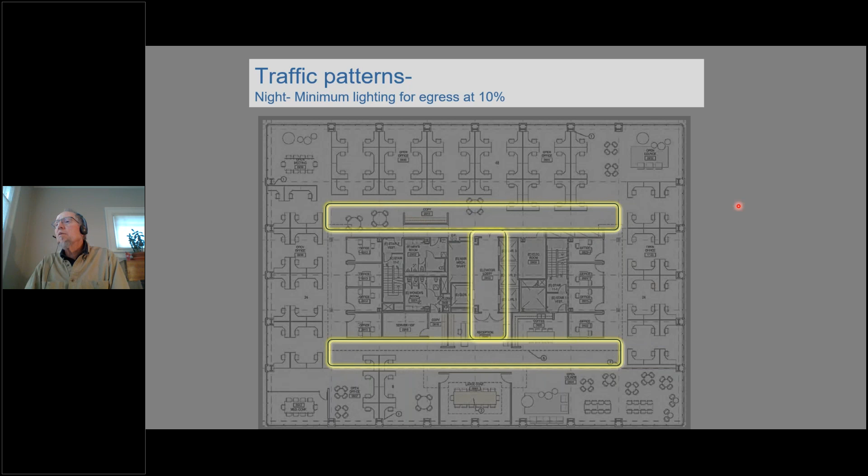And now we get somebody who comes into the office early. It's still dark outside, they're the first person in the office. So they get off the elevator lobby and all the lights go to 30%, everything just kind of goes up a little bit. But in this elevator lobby, it's up at 90%. Along with this, once they step into this corridor, this goes up to 90%, and everything else is still down at 30%. And now they go to their workstation - this is up at 90%, and they're just going to work away in that little area.

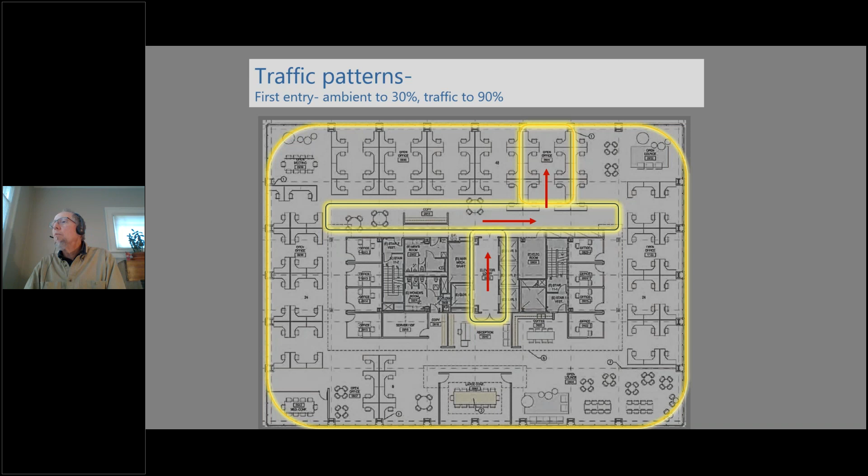Now it's a little bit later in the day. Someone else comes in, say it's summertime around 7 or 7:30 in the morning, and one more person comes in. By this time there's plenty of daylight, so all these lights are either off or very low - this is our 30% zone. But our other worker is still there, still working, with lights at 90%. This area is at 90% because someone came into this interior space and went to their workstation. So we've got 90%, 90%, 30%, and off.

And you can do this because all those fixtures out there have their own little autonomous daylight sensors.

Now maybe it's slightly occupied. It's summertime, a lot of people are off on vacation, so we've got somebody working here, someone working there, a couple people here. Maybe the conference room is occupied - they've got the blinds shut though, so the lights are on. Just different ways - you can see how there's lots of savings potential here with this idea.

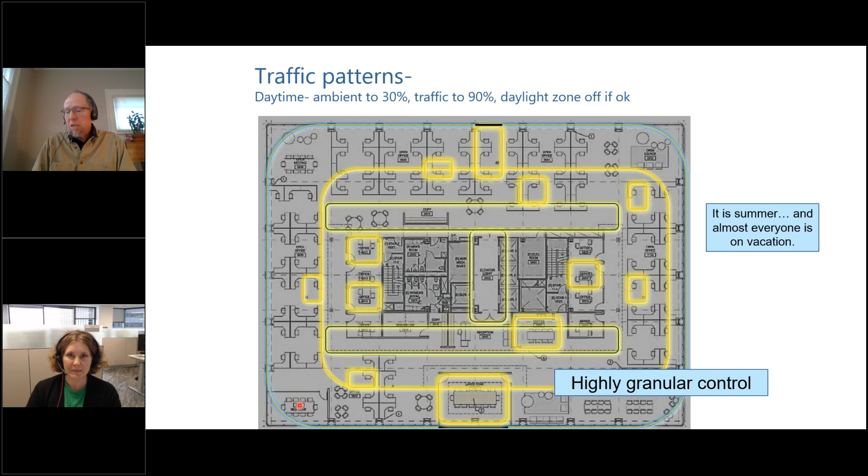So there's costs associated with that, long-term costs, but also setting it up. I don't know if that answers your question. The fixtures themselves probably cost a little bit more. One thing I should say, though, is the utilities are very eager to have you use them, and so the incentives are higher if you use LLLC product. Let's go to that slide that we had up.

Another question? I lied, it was two thank yous, not questions. Well, but I did have a question.

The lights we have now here have individual controls on them, right? They do, yeah. So I can walk into an area that's unoccupied — we're in hybrid, so there are areas during the workday where a group of desks might be unoccupied because people are at meetings or working from home. They can be right by the perimeter zone, so they'll be off. But if I walk into that area, the lights will come on, but not to full brightness because they're by the window. So yeah, it's working there.